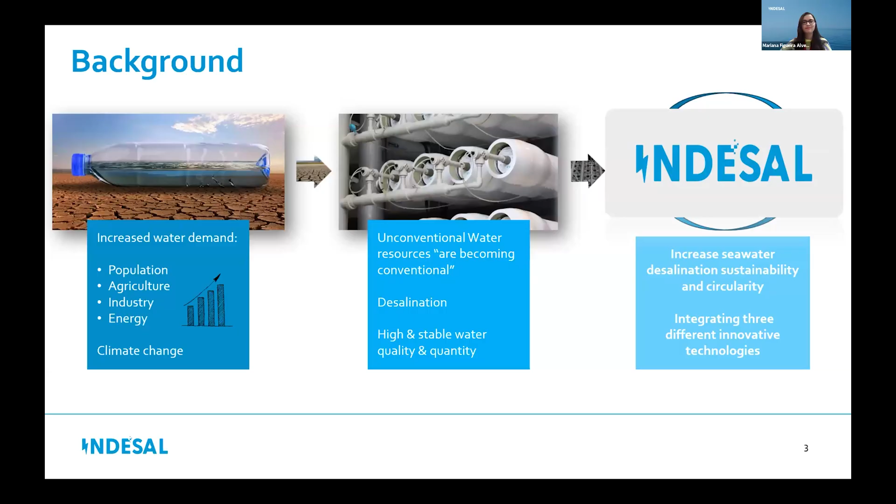The objectives of LIFE INDESAL are to improve the efficiency and circularity of seawater desalination with a novel integrated process. We have three pillars. First, we want to increase energy efficiency of seawater desalination, and for this, we proposed applying a low-pressure multi-stage reverse osmosis. The second one is to generate renewable energy from brine.

For this objective, we propose the use of reverse electrodialysis. And for the final objective, to transform brines into chemicals needed within the desalination process, we propose the use of electrodialysis with bipolar membrane.

Here we have not only the idea of increasing the efficiency of desalination of reverse osmosis, but also we want to give value to the brine, the desalination brine. The reverse electrodialysis and the electrodialysis with bipolar membrane will use this brine that before was considered a waste stream of the desalination process. Now we want to add value to this stream.

So here we have an overview of the INDESAL project. ACCIONA is the coordinator, and we have as partners Apria Systems, University of Cantabria, REDStack, and Revolve, partners across Europe. We started this project in August 2022. We are finalizing this month, but we are still operating the pilot, and we have plans to keep the operation a few months after the end of the project.

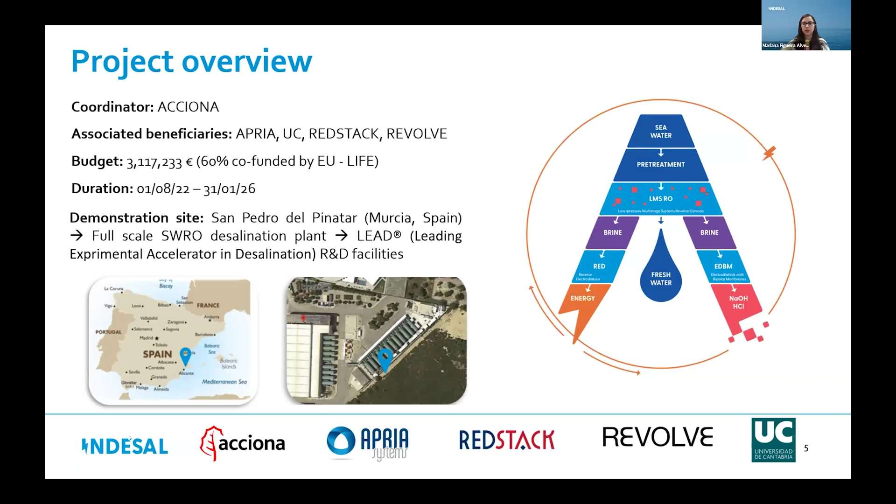So this is the technological scheme of INDESAL simplification. We have real seawater entering the system. We have first a pretreatment and then the LMSRO, low pressure multi-stage reverse osmosis. So the permeate of the LMSRO is fresh water that can be used for potable, agriculture, and industrial use. Here we have just the permeate, we're not doing the remineralization. We would need this step to have drinking water, but we can already check the quality of this permeate produced.

And with the retentate of the LMSRO, the brine, we can have two processes in parallel: the reverse electrodialysis, RED, to produce energy, and the EDBM, after nanofiltration pretreatment, to produce sodium hydroxide and hydrochloric acid that can be used in the cleaning procedures of the LMSRO.

So here the low pressure multi-stage reverse osmosis is the technological expertise of ACCIONA. We have two passes of reverse osmosis, so the principle is similar to reverse osmosis. We have seawater being pumped at high pressure against a semi-permeable membrane. The membrane lets the water molecules pass and will retain most of the ions. So we produce these two streams: the water molecules that pass the membrane produce the permeate, and the part with the ions that were rejected produce the brine. So we generate these two streams, and usually the brine was considered a waste of the process, but now we are valorizing this stream.

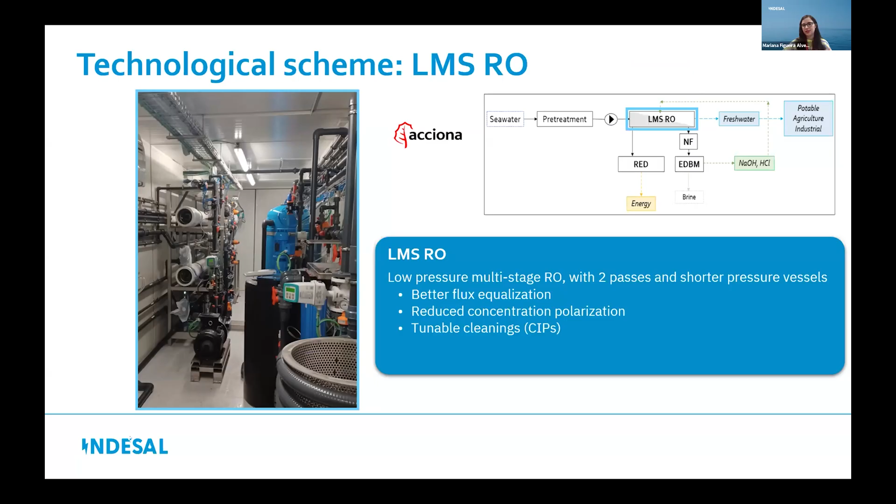So the other technology that we have is the RED. I will not explain the RED in detail because Hendrik will do this later. RED is the technological expertise here of REDStack and also Apria Systems. The technology uses ion exchange membranes and the salinity gradient. The driving force is the salinity gradient to produce renewable energy. And we have a flexible pilot, we can use 1 or 2 stacks.

So we have 2 stacks in series, and we designed it in a way that we could opt for using 1 or 2. For us, it's very interesting to use brine for the salinity gradient, because the brine has a higher concentration than the seawater, so we can generate an even more powerful salinity gradient using the brine from the LMSRO that used to be considered a waste of the process.

And here we have the other technology, the EDBM. It works in parallel with the RED, so the brine is divided for the two different pilots. I will not explain the EDBM in detail because Marina will explain better later. But it's a bit similar to reverse electrodialysis in that we have ion exchange membranes, but here we also apply a bipolar membrane, which is important for producing acid and base. While the RED uses the salinity gradient as driving force to generate energy, here in the EDBM we apply energy, so it's an energy consumption process where the electrical field generated is the driving force for the ion migration. So here we want to produce sodium hydroxide and hydrochloric acid that can be used in the cleaning procedures of the LMSRO, and this is the expertise of University of Cantabria and Apria.

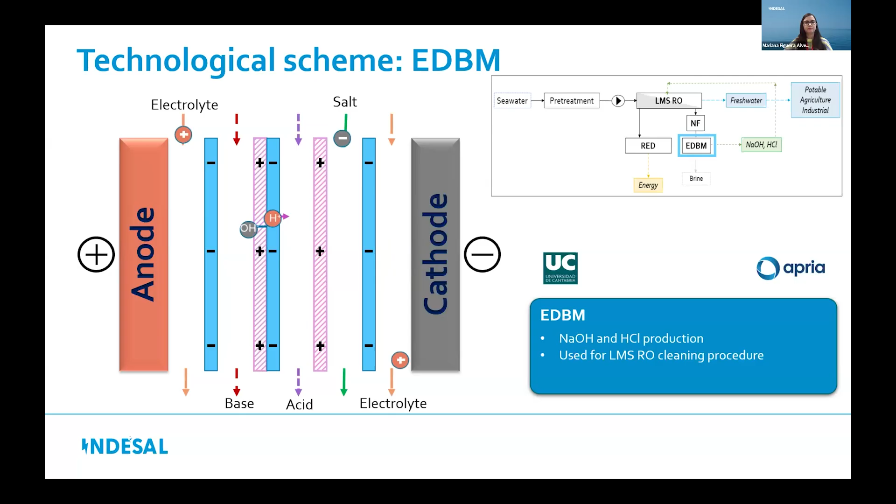And here you can see some images of our pilot. It's located at the LEAD facility of ACCIONA. We have 2 containers, one on top of the other. In the base we have a 40-feet container with the LMSRO and the pretreatments of the LMSRO, and in the top we have a 20-feet container with the EDBM and the RED pilot.

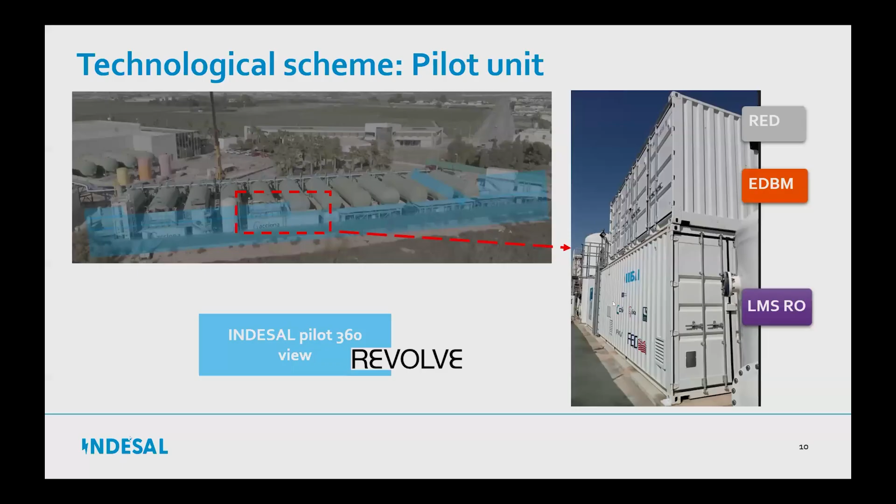And now I will present you some results that we obtained with the project.

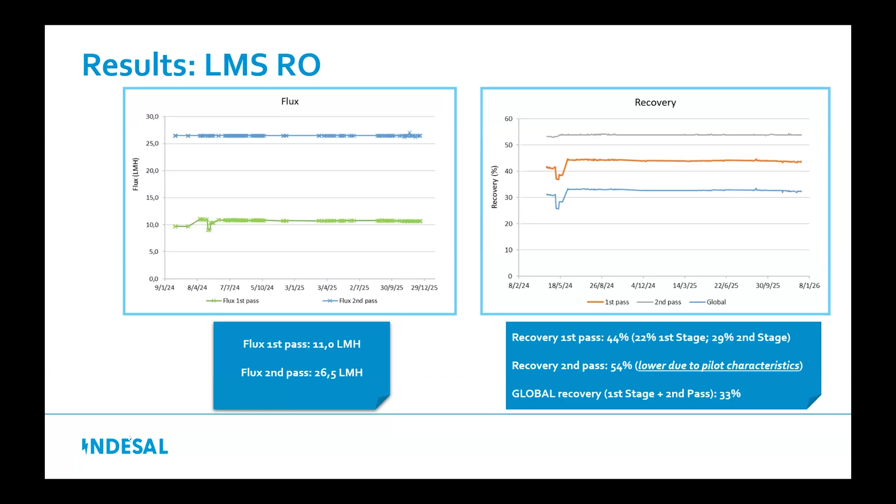And here we have the results regarding the quality of the permeate. We had a goal to produce permeate with TDS below 200, and we achieved this goal. We had an average of 180 milligrams per liter of TDS in our permeate, starting from 34,837. So it's a very robust system that can reduce not only the total dissolved solids but also sodium and chloride, which we kept below 100 milligrams per liter.

We can also see here the boron concentration. In the seawater we had a concentration higher than 4, almost 5. In our global permeate, we reached 1.5 ppm of boron without adding sodium hydroxide in the second pass.

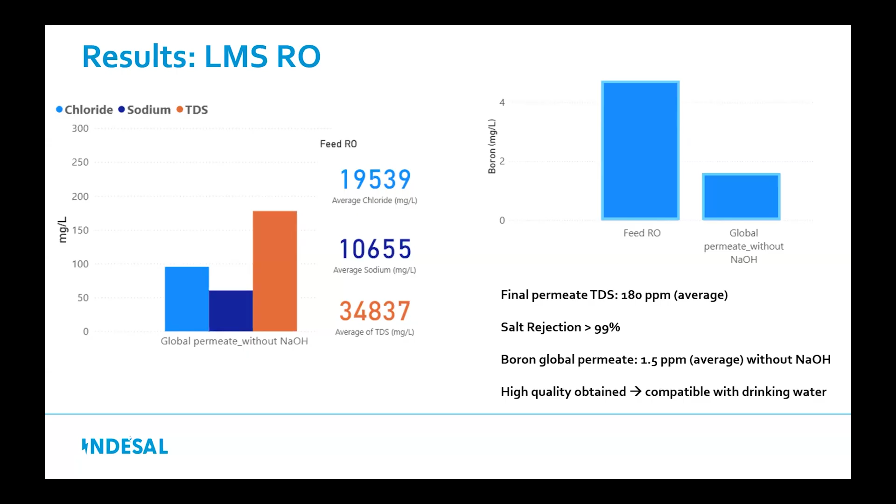Now let's also present some results of the RED. As I mentioned, we are still operating our pilot, so these numbers are not final. We're still calculating, but this is what we have so far.

We tested two options: two stacks in series or just one stack. With only one stack, we produce about 0.06 kilowatt-hours per cubic meter of brine, with 0.92 watts per square meter of membrane of power density. With two stages, we can produce more energy.

So up to 0.12 kilowatt hour per cubic meter of brine with a power density of 0.64. We saw that the first stage is more efficient to produce energy, but this was expected because when the streams enter the first stage, you have a bigger gradient, a bigger difference of salinity between the streams, and as ions migrate, this gradient reduces. But still, when they leave the first stack, there is still some capability to produce more energy, still a gradient that can be explored. So with the two stages, we could reach a higher energy production per cubic meter of brine.

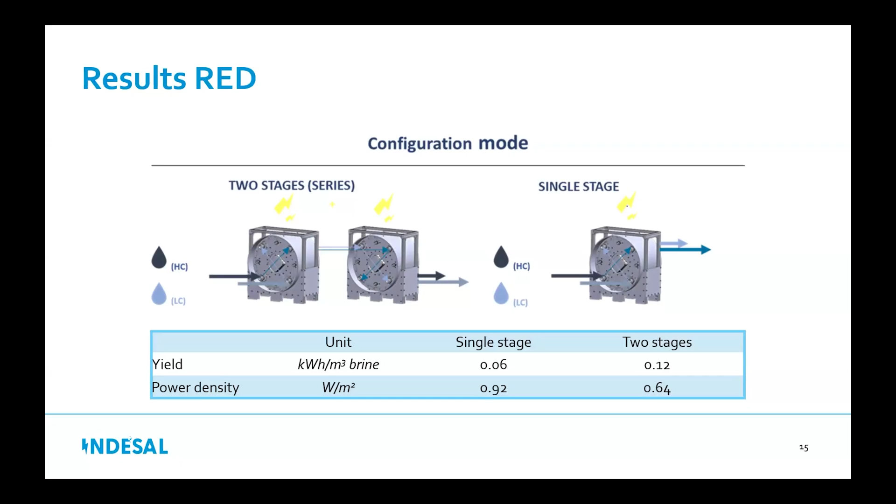So in conclusion, we have here the first objective to increase energy efficiency of seawater desalination. With our LMSRO system, comparing with a conventional reverse osmosis with second pass in similar conditions, like same quality of feed as our process, we obtained a reduction of 0.2 kilowatt hour per cubic meter of permeate in the specific energy consumption. Regarding the generation of renewable energy, we could produce up to 0.12 kilowatt hour per cubic meter of brine with the reverse electrodialysis. And with the electrodialysis of bipolar membrane, we could produce 100% of the chemicals needed for cleaning, making our desalination process more circular.

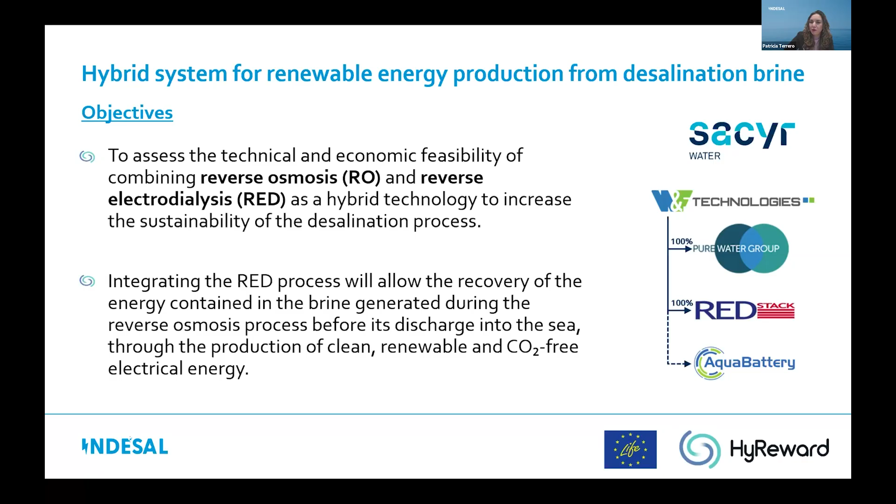The project is coordinated by Sacyr, and we work in a consortium with two companies from the Netherlands: REDStack, which is also involved in the INDESAL project, and Pure Water Group.

Mariana has already presented the RED technology, so I'm not going to explain it deeply, but you know that reverse electrodialysis is a technology that allows the generation of electrical energy from the salinity gradient between two streams with different salinity concentrations. The energy produced with this technology is called blue energy, and is considered a completely renewable and sustainable energy without CO2 emissions or other greenhouse gas emissions.

In the technology concept that we have validated in the LIFE HyReward process, we have used the brine of the RO process as the high salinity stream at the RED process, and the treated wastewater, the effluent of a wastewater treatment plant, as the low salinity stream.

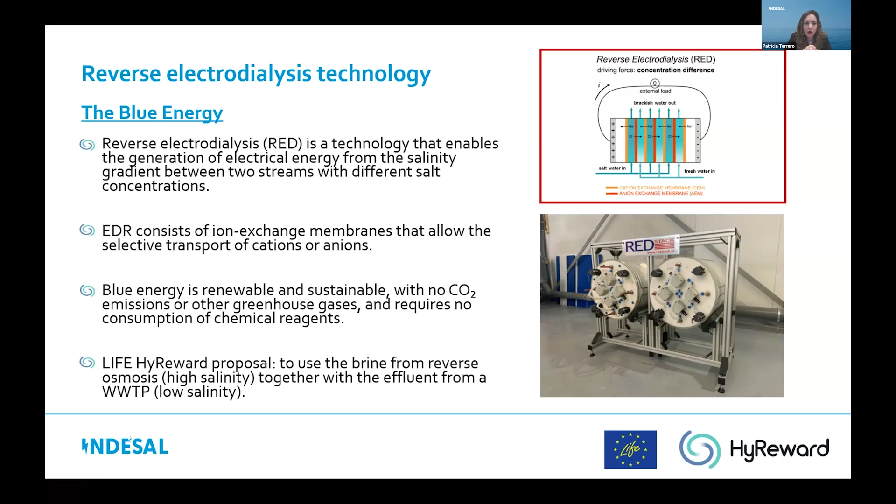This brine has a high concentration of salt and has a high potential energy that can be harvested in the RED process. But for this we need a stream with a low concentration of salts. As I have said, in our case we have used the effluent of the wastewater treatment plant, the treated wastewater. These two streams, the brine with high concentration of salts and the treated wastewater with low concentration of salts, we have fed to the RED process.

This process is able to harvest the total salinity gradient between these streams, generating energy in the RED process, and also producing a reduction in the salt concentration of the brine. For this we have studied another alternative of this technology concept: the recirculation of the diluted brine again to the RO process in order to increase the total recovery of water.

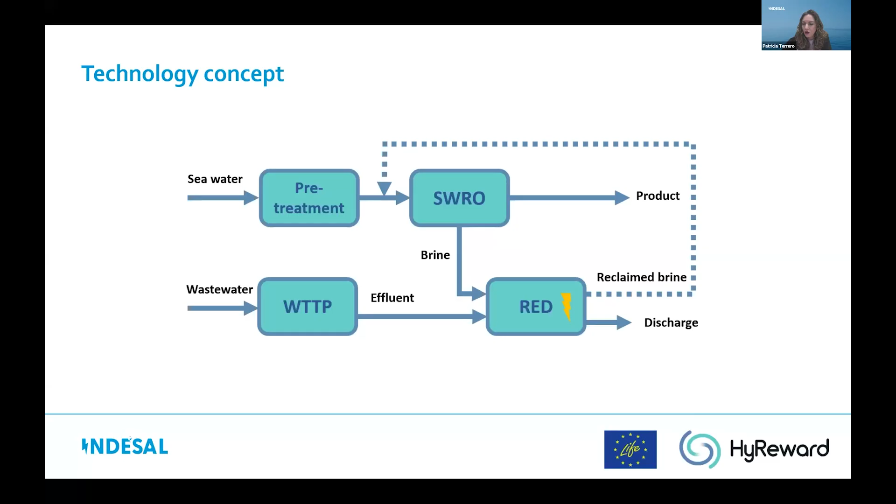And if we recirculate this diluted brine, we are also going to improve the total water recovery of the desalination process, which translates into the same permeate production or total water production, while reducing the seawater intake and the pretreatment needs in the Desal plant.

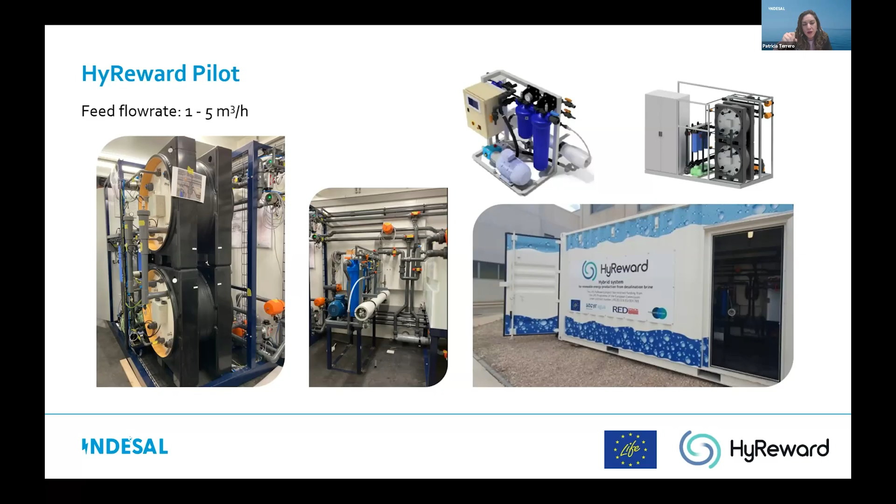Here you can see the RED stacks developed by REDStack, and for example the electromembrane. Well, I have said we decided to install it in a container in order to test the technology in different locations, and we have validated the technology in different desalination plants.

In two phases. The first validation was carried out at the Alicante desalination plant in the southeast of Spain. In this phase we have validated the technology to investigate the production of electrical energy in the RED process using RO brine and permeate as a low salinity stream, because in this plant we didn't have available real treated wastewater, so we optimized the technology using permeate in this case.

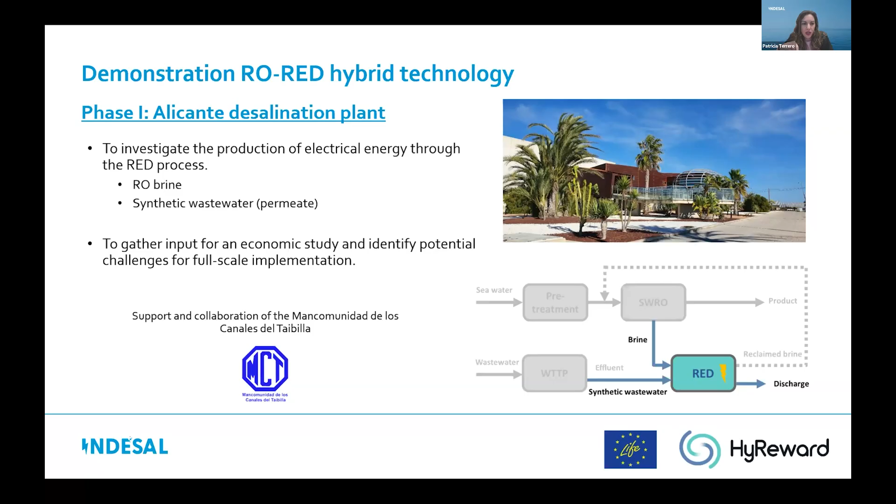This experimentation also allowed us to start the economic study of the technology and identify potential challenges for its implementation at full scale. The objectives of this phase were the validation and optimization of the RED technology to maximize blue energy production using permeate as the low salinity stream and brine as the high salinity stream.

In this case we have obtained a maximum energy production of 0.31 kilowatt-hours of blue energy per cubic meter of brine. And if we could install the technology at full scale, with this total energy production we could cover 66% of the total energy consumed in the pretreatment. So it's a very important ratio.

And also we have obtained a reduction in the brine salinity that depends on the ratio and the combination of flows between brine and treated wastewater. But we have obtained brine salinity close to 35 grams per liter, similar to seawater levels, enabling the potential recirculation of the brine again to the RO process.

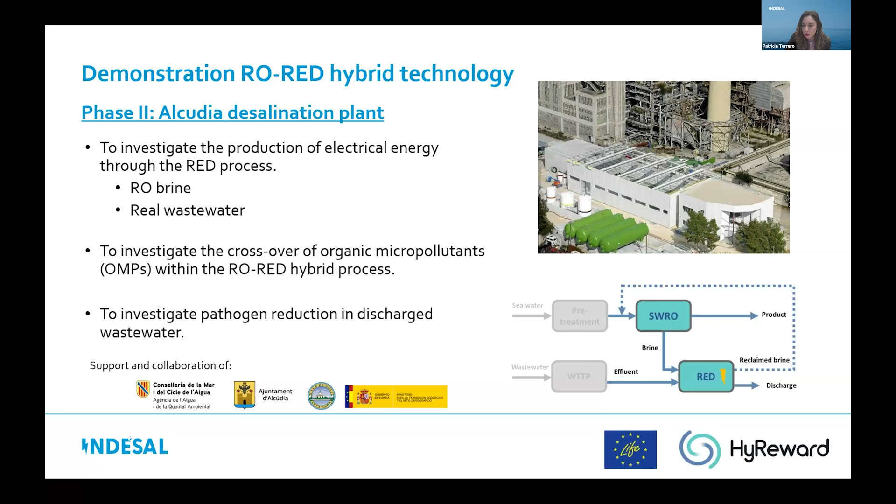I would like to say that in this phase we changed the membranes used in the RED process. We changed them because in Alicante we saw some leaks in the membranes, so we decided to replace them and install another type with a more compact design, and compare the results obtained with both kinds of membranes.

With these new membranes we were able to reduce the leakages in the process, but we obtained less energy production. That was the main impact. In the next slide we compare the results between Alicante and Alcudia: for example, in Alicante we obtained a maximum production of 0.31 kilowatt-hours per cubic meter of brine, while in Alcudia we obtained a maximum of 0.24.

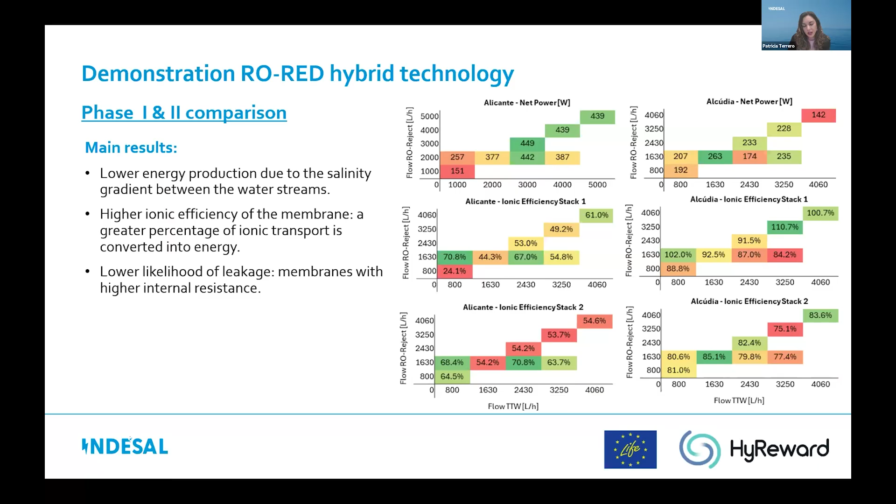Also, we obtained higher ionic efficiency of the membranes due to the new design installed in the RED process, but we obtained lower energy production due to the higher internal resistance. However, we were able to reduce the leakages we suffered in Alicante. For this reason, we prefer not to use the second model of the membranes.

To sum up, the HyReward project seeks to improve the energy efficiency of seawater desalination while optimizing water recovery, reducing brine discharge, and minimizing the use of chemicals, promoting a more efficient and sustainable solution focused on the circular economy and water resilience in water-scarce regions.

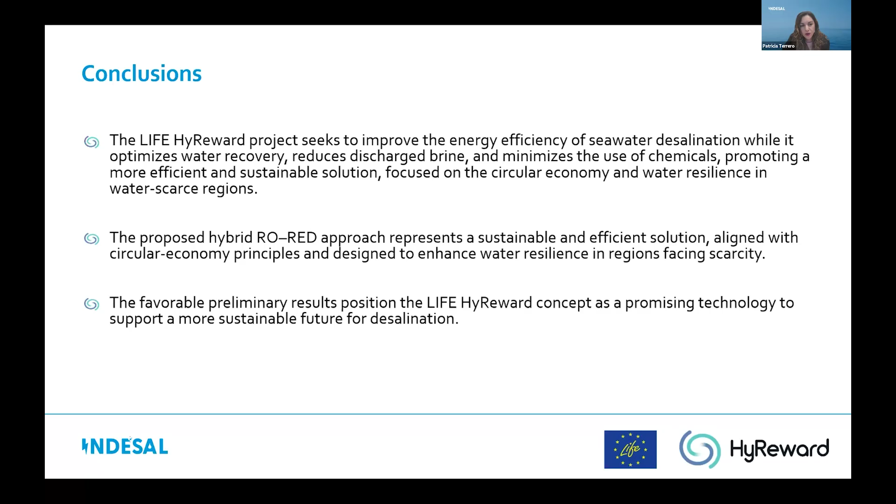The proposed hybrid RO-RED approach represents a sustainable and efficient solution aligned with circular economy principles and designed to enhance water resilience in regions facing scarcity. The favorable results position the LIFE HyReward concept as a promising technology to support a more sustainable future for desalination. Here you can see the main data of the project.

As I said, this is a project funded also by the LIFE program. Sacyr has been the coordinator, and we have worked in a consortium with REDStack and Pure Water. The project finished recently, in October of last year. Well, this is all. Thank you for your attention.

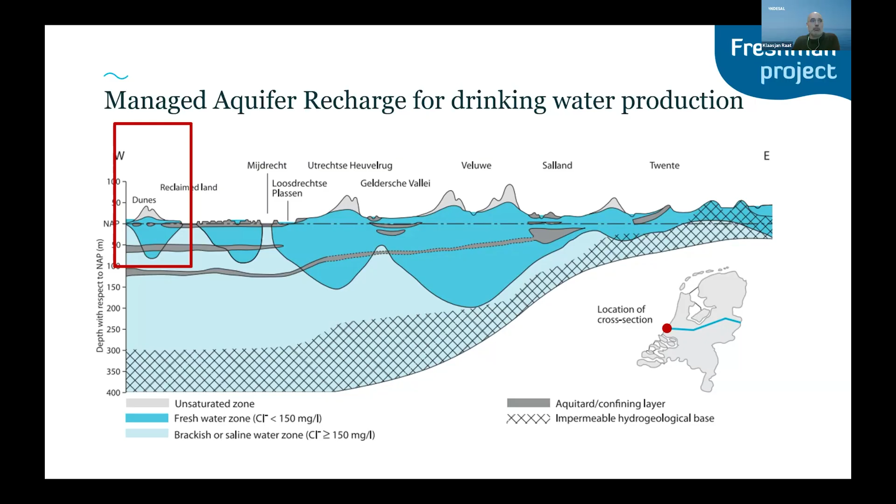Now, these infiltration systems are beautiful as well, integrated into the nature area. This is what an infiltration pond looks like in the coastal dunes. But basically, the systems are at the end of their maximum capacity.

Climate change, low flows of the River Meuse and Rhine, especially deteriorating water quality, makes us not always able to take water from these rivers, and there's an increase in water demand because population is growing.

So what we looked at in this project is, if we extract groundwater from underneath that system, can we enhance the functioning of that system? But also, and I think you may be interested in that, can we use that brackish groundwater as an additional drinking water source?

In normal operation, this is kind of a schematic. You see the freshwater lens that we use and replenish with river water. If we have an intake stop, we have to switch to deeper wells to produce drinking water from, depicted in this picture. But the salt and brackish groundwater is very close, so once we start extracting water there, you have the risk of upconing.

Now, I'm very much into water resources, I have a background in hydrogeology and how to manage these types of systems. If you also extract the deeper underlying brackish or saline groundwater, you can restore the hydraulic gradient, and you can make sure that, one, you increase that freshwater lens, but also prevent any salinization of that freshwater well.

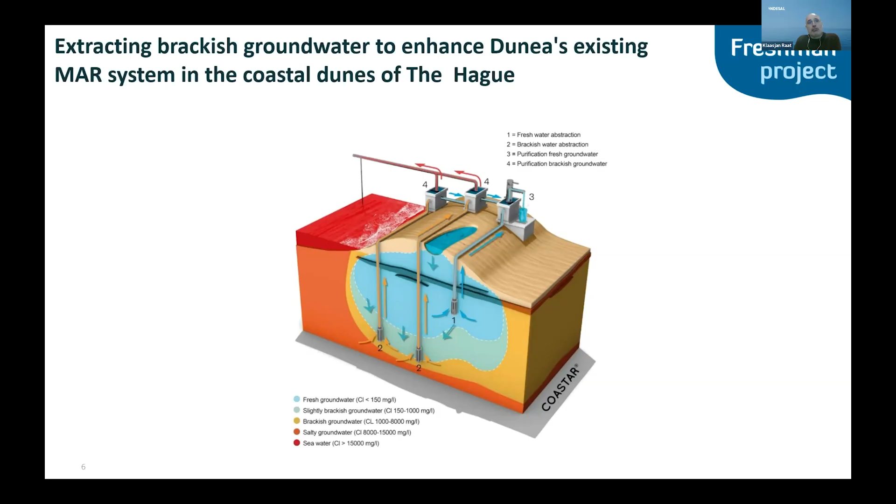This is what we tested in the whole freshman project, both the hydrogeology, but also, of course, if you extract brackish groundwater, it's a perfect source to produce drinking water from. This is what the whole pilot looked at.

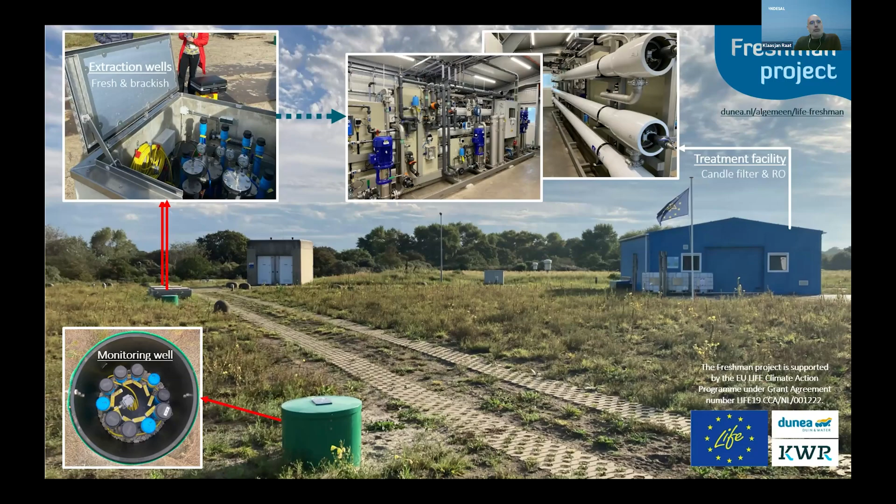So we had a subsurface part with extraction wells for both fresh and brackish groundwater, a whole set of monitoring wells, and in the small building there we had the RO treatment facility, where we did all these types of tests. Now I'll show you some highlights and brief results, first some hydrogeology, then I'll get to results on the RO treatment.

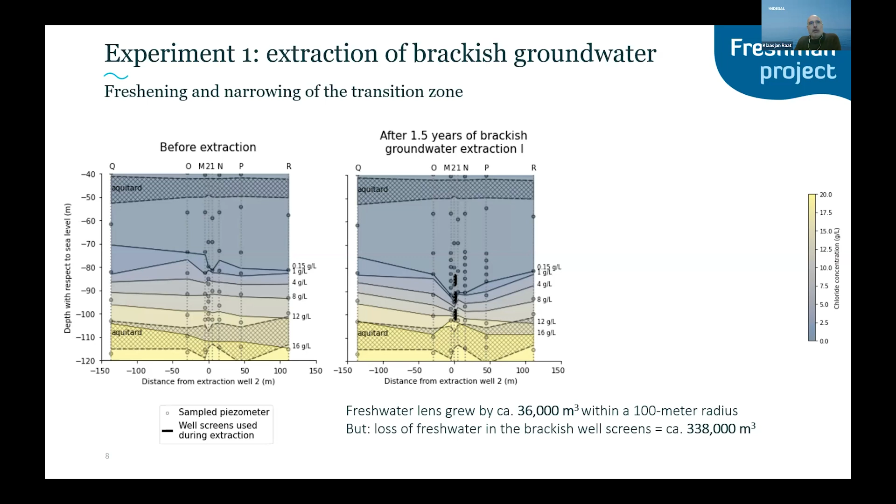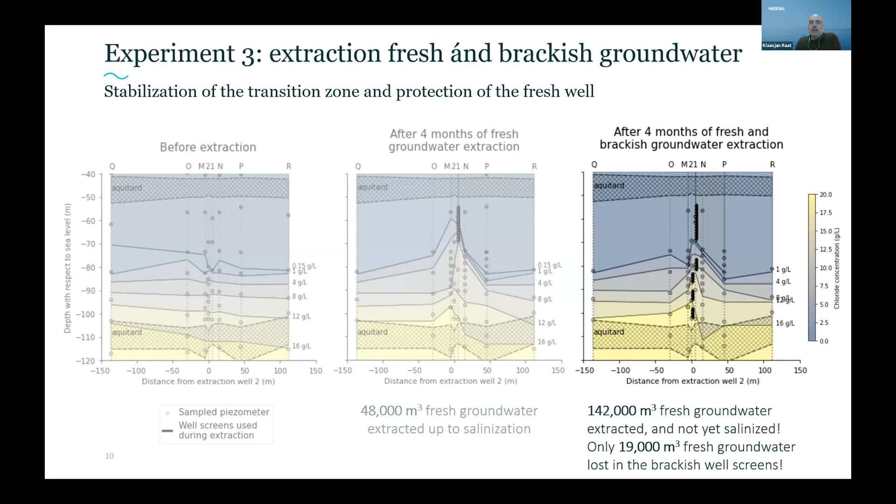So what we did then was extract brackish groundwater again, but combine that with fresh groundwater extraction to see if we could balance the fresh to saline interface and make these things stable. That actually worked really well. We could produce fresh groundwater without those wells getting salinized, by extracting a small proportion of this brackish groundwater.

Now, you're probably more interested in that brackish groundwater, how you can use it. So we had experiments with reverse osmosis treatment, a two-stage system. We operated it at 50 to 65% recovery because we wanted to refrain as much as possible from any anti-scalants.

We had a stream of about 10 cubes per hour permeate production, but I think what is most interesting for you is that we had an anaerobic treatment. That groundwater is anaerobic and also has a lot of dissolved iron, so keeping the oxygen out is really key to operating these types of systems.

My technology colleagues and water treatment colleagues were complaining it was kind of a dull pilot. With this anaerobic groundwater, it's really good in terms of not having any scaling issues. The main scaling issue was trying to keep the oversaturation of especially the carbonates under control.

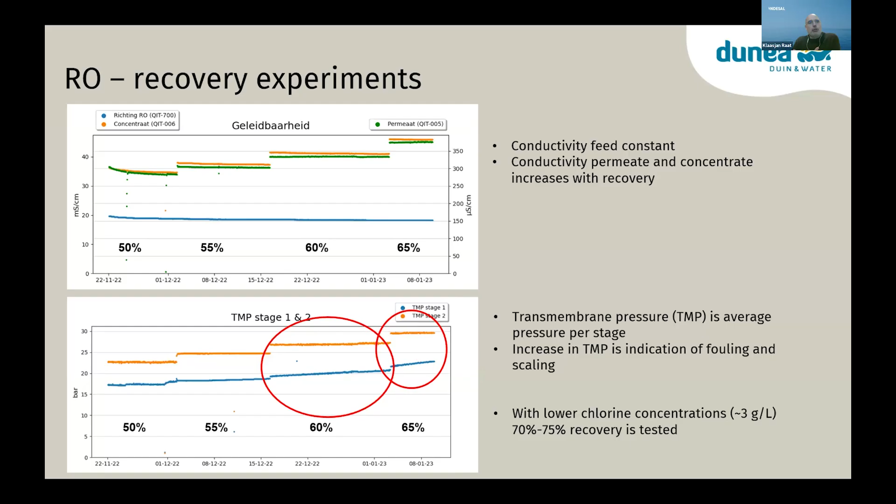Some pictures on conductivity, but also on membrane pressure - with 50-55% recovery we could really keep this stable without having any anti-scalant dosed. If we go higher in concentration or recovery, then you get some first scaling. Of course, flux measurements - we also did some experiments, or colleagues did, with fluxes over the membranes, to really get this system in place.

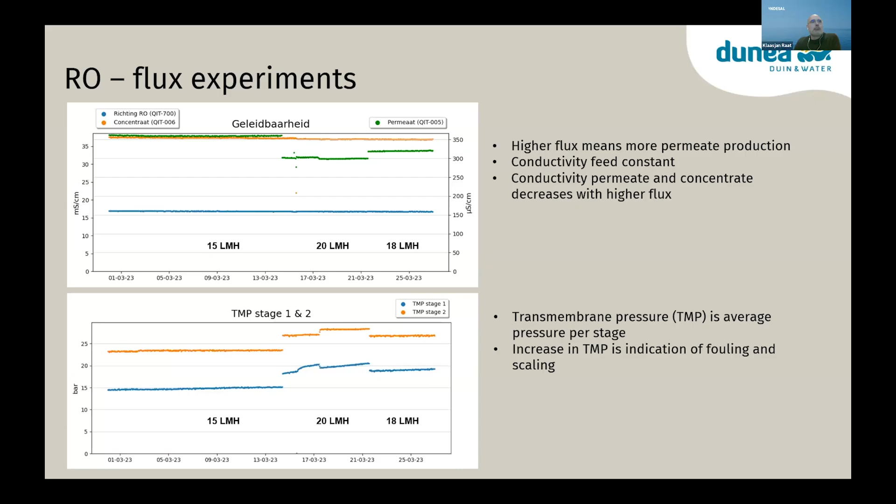Now what's very important is the water quality of the permeate. If you want to produce drinking water, ammonium and boron are elements that can partly pass membranes. But also, if you want to produce drinking water, you have to think about remineralizing it, so we have to do something about the calcium, magnesium, and bicarbonates to get it to drinking water levels.

I think this is one of the most interesting parts from the water treatment and drinking water production side - the effects of mixing this permeate with the normal drinking water produced there. In the Netherlands, we do not chlorinate our drinking water. So when the drinking water goes into the network, no chlorine is added. We can do this because we have moderate temperatures, so the water doesn't get that warm, but also we make sure we have a very low growth potential for any bacteria. In that way, we can keep the drinking water biologically stable without adding any chlorine before distribution.

But what happened if we mix the permeate with the drinking water? Remember, this permeate was produced from anaerobic groundwater. We had a lot of biofilm production. So actually we had, in our terms, biologically unstable water, and we cannot use that and put it in the net.

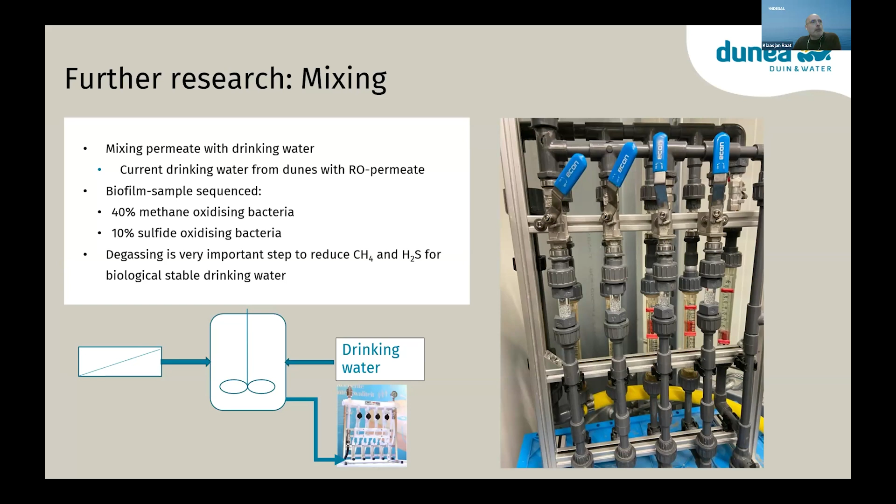And so we did experiments and tests, and a lot were on methane and sulfide oxidizing bacteria. We are further researching this, but the theory now is that those little traces of methane and hydrosulfuric acid produce a little source of these bacteria.

These bacteria are in that water, present in the drinking water, and we got biologically unstable drinking water. So degassing there is very important. I think, yeah, this is my last slide. So I took you a bit into the groundwater and the subsurface.

We can improve these managed aquifer recharge systems by combining them with tailored brackish groundwater extraction. Anoxic groundwater is an excellent feed for reverse osmosis treatment, keep the oxygen out, obviously. And that degassing was very important here, degassing of the permeate after you produce it.

And I think, yeah, that's what I wanted to share with you today at this webinar. So thanks, we'll move on to the next presentation. I'll pass the floor to José Luis Cortina Pallas from EXBRINER.

Thanks, Micaela, and thanks to the INDESAL project for this invitation. The project that I'm going to present is totally different. It's a doctoral network, training people on research, and I'm doing this on behalf of the coordinator, Efrem Curcio from University of Calabria.

This doctoral network was built to develop activity in what we call circular blue industry, focusing on how seawater desalination brines could provide more water, produce chemicals, and produce energy. These three main vectors of development were devoted to process intensification, developing new membranes, new materials, new processes, and then validating them for energy and chemicals production, also trying to develop this concept of seawater mining.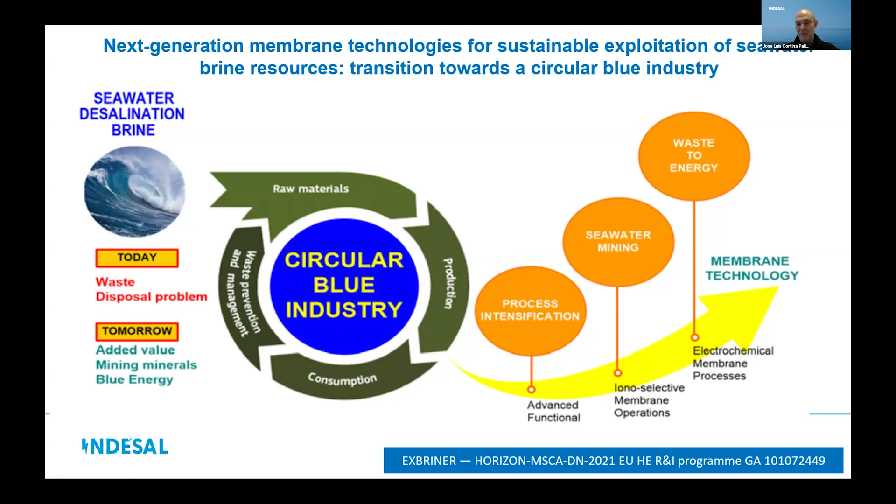More specifically, the project incorporates 10 different universities and 4 industrial partners, and develops a concept where, on the upper part of the slide, the new developments, this new generation of membrane technologies, are focused in 3 main areas.

The first is working on this concept of thermoplasmonic membranes. The second is to develop membranes where the selectivity patterns are tuned by introducing metal-organic frameworks to introduce very selective ionophores like zeolites. And finally, working on optimizing the performance of ion exchange membranes, and new ion exchange membranes that are also being developed in the project.

These materials provide new solutions to something clear for most of the audience: when we have seawater desalination brines and want to recover materials to produce chemicals, we need two things. One is to pre-treat the brine, typically by nanofiltration or electrodialysis, to reach one stream very rich in monovalent ions on the bottom, and on the upper part a stream very rich in divalent ions, where we could recover, for example, magnesium.

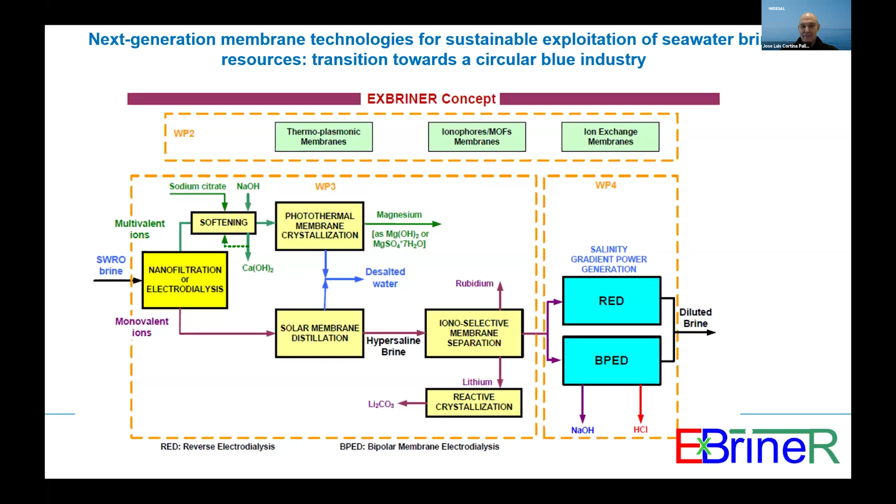Now we have a very stressing next few minutes, because we have 10 projects or 10 ideas to present, and I've prepared one graphical abstract for each, so I think we'll be able to do it in the time we have. The first project will be presented by the students, because the most important thing you are going to see now is the candidates who will soon become new engineers starting to work maybe in your companies.

This is the work developed by Mohammed Hassan at Leuven University. Hassan is trying to develop new nanofiltration membranes using a different polymer chemistry: instead of using polysulfone as a starting point for building the nanofiltration membrane, he uses polyacrylonitrile. After that, he has been working on interfacial polymerization to develop the selective polyamide top layer that we are familiar with in nanofiltration membranes.

All the selectivity patterns are allocated to the use of these metallic organic frameworks or zeolites, placed either in the upper layer, or even located between the polyacrylonitrile or the polyamide layer. This is applied in the first stage of separating monovalent from divalent ions.

Now moving on to activities related to overcoming the use of reverse osmosis, using membrane distillation as a technology for increasing water recovery, and also providing the possibility to move to recovery of salts by using crystallization.

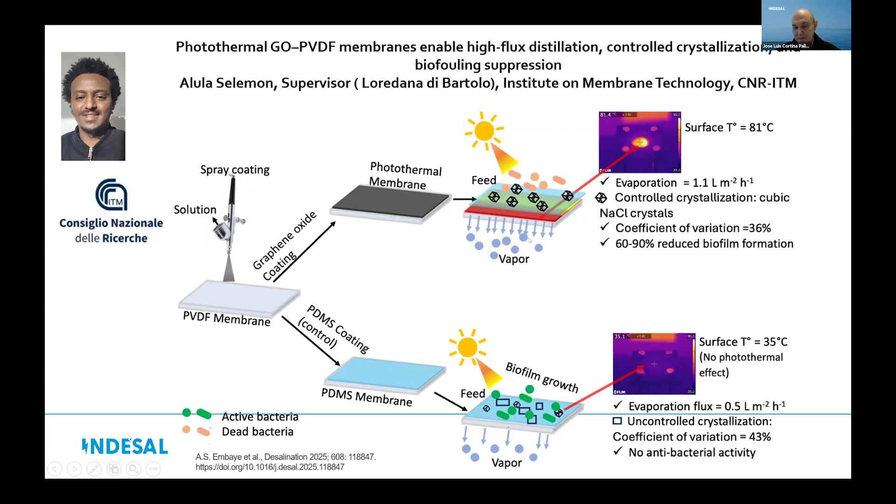The third project, developed by Indira Chimanlal at INSA Toulouse, is a more practical or engineering application of this concept, where hollow fiber membranes are used in vacuum membrane distillation studies. The idea is to work on brine concentration for increasing water recovery, incorporating solar energy as a source to achieve the concentration and crystallization stages.

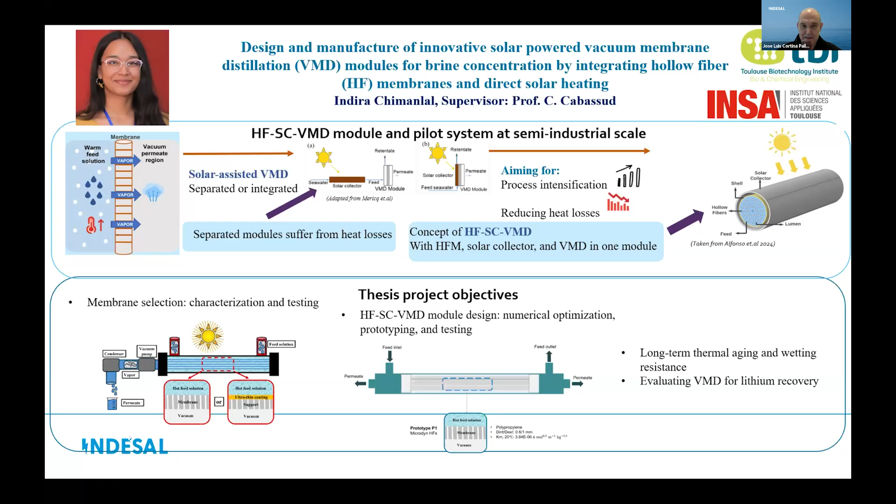The last topic in that area, developed by Tstone Dadiani at the University of L'Aquila in Italy, is a more fundamental study on the use of XPS for characterization of membranes and the processes occurring at the surface, especially when working with membrane distillation and membrane crystallization. The work is focused on lithium recovery projects, identifying the stages that provide the possibility to reach suitable nucleation and crystallization conditions.

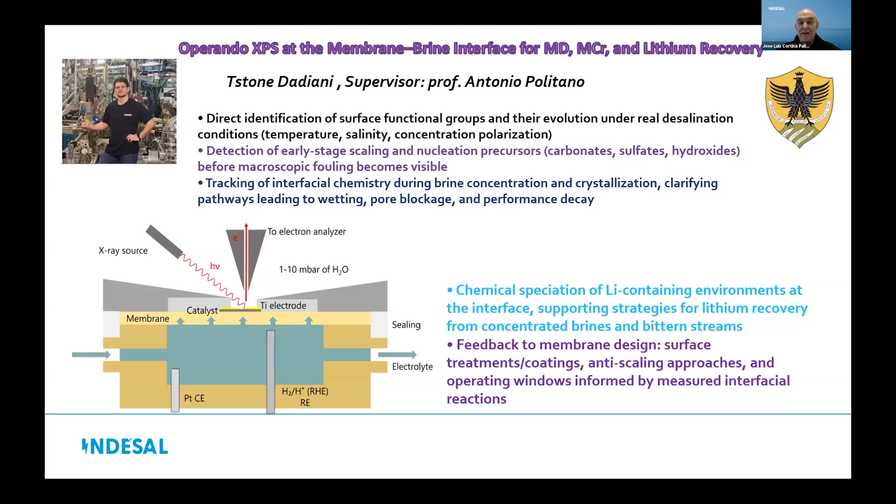We move to the next group of students working on the development of ion exchange membranes and applications. The first case is Mecca Venio, working at Nova University in Lisbon.

Her work focuses on using 3D printing to develop profiled ion exchange membranes, shown here. She has been working on developing both cation and anion exchange membranes, with detailed structures creating profiles using stripe or chevron units. The work is now being validated in different applications, from hydrogen production to reversal electrodialysis and also electrodialysis.

The next project, developed by Federico Dei Sommi, is working at UCT Prague, where there is a technology group focusing on modeling and characterizing ion exchange membranes and the performance of these systems. He will develop validation of new ion exchange membranes, including others developed by incorporating metallic organic frameworks.

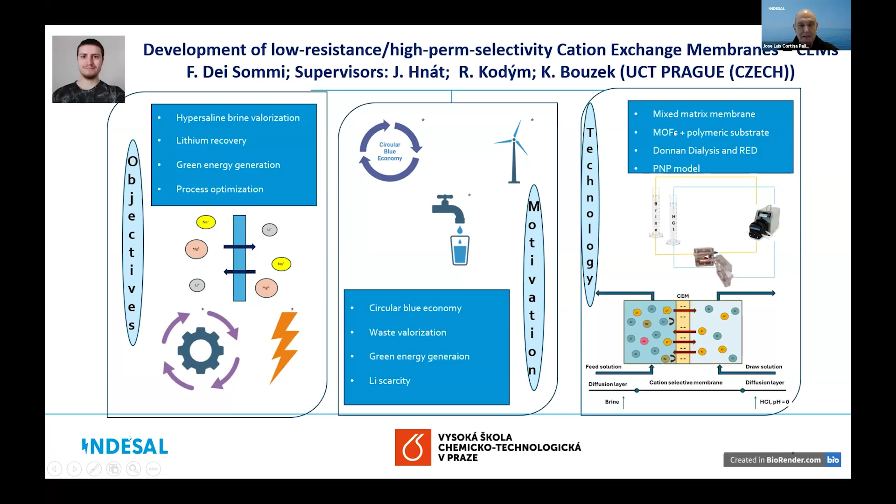In the same direction, the work being developed by Anastasia Lima here in our department in Barcelona should be mentioned. She has been focusing on the application of ion exchange membranes and bipolar membranes in the on-site production of chemicals from sodium chloride brines, especially focusing in these first stages on understanding the effect of temperature. We have been seeing that typically most membranes are characterized at room temperature.

But as was commented by Mariana, temperature evolves, for example in these pilots, moving from around winter temperatures below 20 to close to 30 in summer operation, and in other industrial processes the temperature of the stack operation could reach up to 40 degrees.

And just to finalize, if I could, Michael, I have three last projects. These are the ones working on more industrial applications of these technologies.

I should mention first the work developing at Aalborg University, working on the use of membrane distillation to demonstrate the production of magnesium as magnesium sulfate or lithium as lithium carbonate from the brines generated from seawater desalination brines.

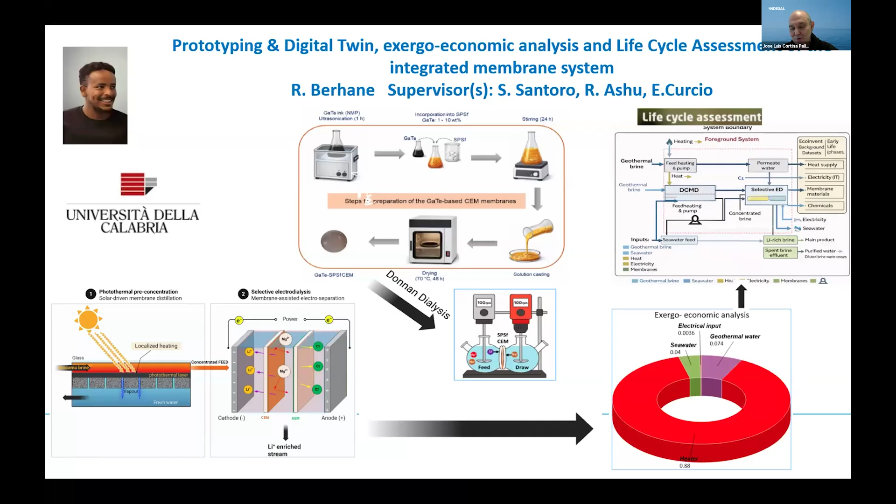The work is being developed also by Robiel Berhane, working at the University of Calabria. It has been integrating the use of both membrane distillation as a pre-concentration stage, and after, in a second stage, ED or ED bipolar for the demonstration of the production of lithium hydroxide and lithium carbonate.

And that's all. I think I was a little bit over the time, but I hope it was clear. Remember that from this project, the most important outcome is those students developing this training work.

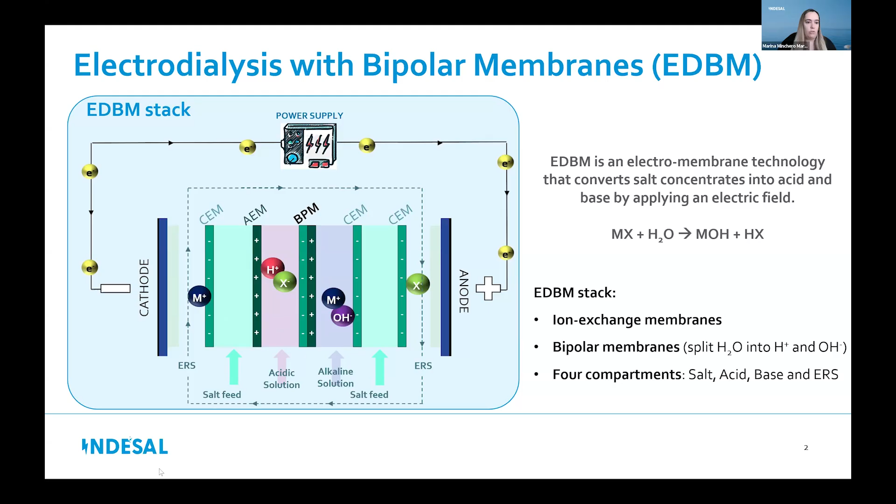As a result, we have four different compartments in the EDBM stack: the salt feed, the acidic solution, the alkaline solution, and the electrolyte rinse solution.

For the desalination application, the most common use of the EDBM is to valorize the brines to produce hydrochloric acid and sodium hydroxide. The EDBM can be applied in desalination to produce these products for direct use within the desalination plant, or it can be integrated within broader brine valorization strategies.

But in the case of the Life INDESAL project, the objective of the EDBM unit was to produce sodium hydroxide and hydrochloric acid for cleaning operations and pH adjustment in the LMSRO unit, thus avoiding the external supply of these chemicals in the plant.

Here you can see a very basic layout of the EDBM process, where the acid and base operate in batch mode, recirculating the streams until reaching the desired concentration of both chemicals.

In this case, the brine that we were using to feed the EDBM comes directly from the LMSRO. The LMSRO process has the particularity that it uses real seawater, and the content of magnesium and calcium has a significant concentration in the brine.

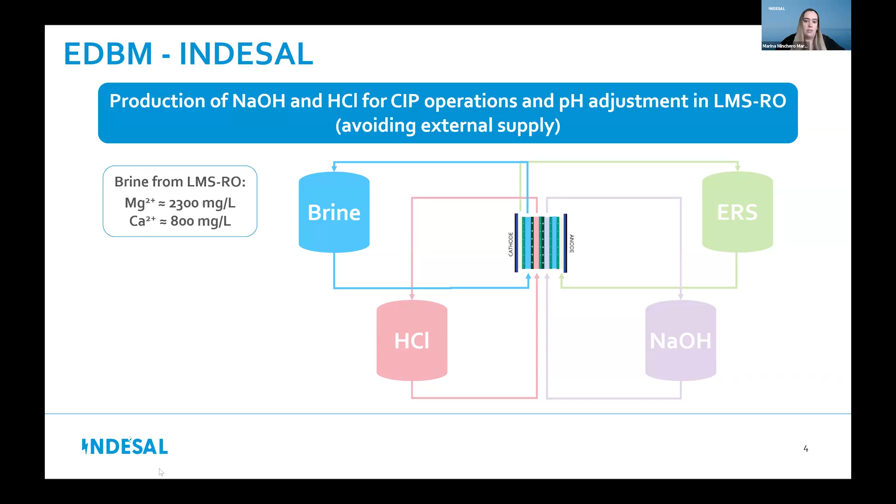So these ions are not recommended for EDBM operation because at pH higher than 10, they tend to precipitate in the form of hydroxide, magnesium hydroxide, or calcium hydroxide. These ions can cause undesirable phenomena such as an increase in electric consumption, scaling, or obstruction in the system.

So to address these issues, we installed a pretreatment stage consisting of a nanofiltration step to reduce the quantity of magnesium and calcium.

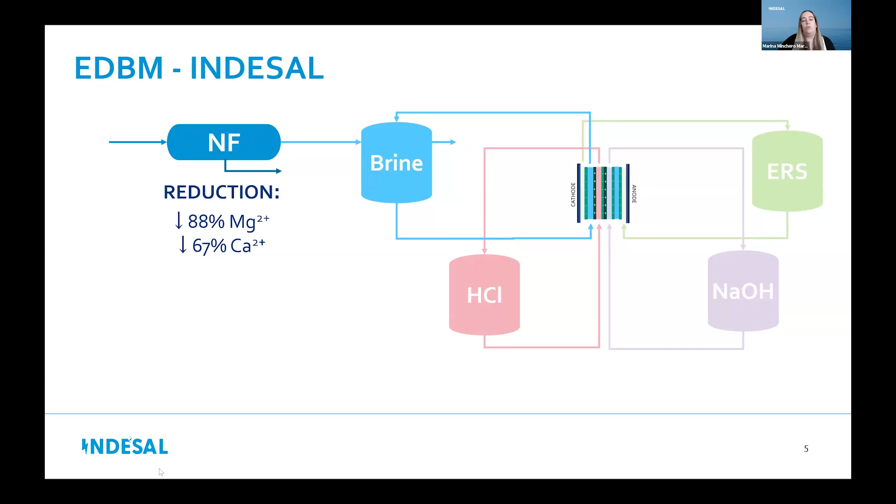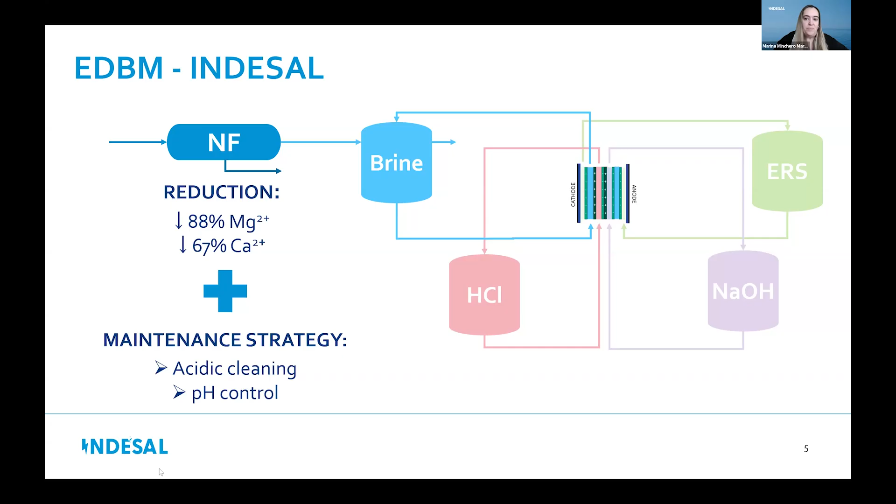We almost reduced 88% of magnesium and 67% of calcium from the brine. As we did not remove the whole magnesium and calcium ions, we also implemented a maintenance strategy to reduce possible problems caused by this, consisting of periodic acidic cleaning of the whole system and control of the pH. With this approach, we could operate under stable conditions and no operational problems related to these ions were observed.

Regarding the production performance, we reached the target objectives in terms of production of both sodium hydroxide and hydrochloric acid in the plants. Beyond INDESAL, the EDBM has already been applied in other desalination related projects, and I would like to mention a couple of these examples of application. The first project I want to talk about is the Water Mining project.

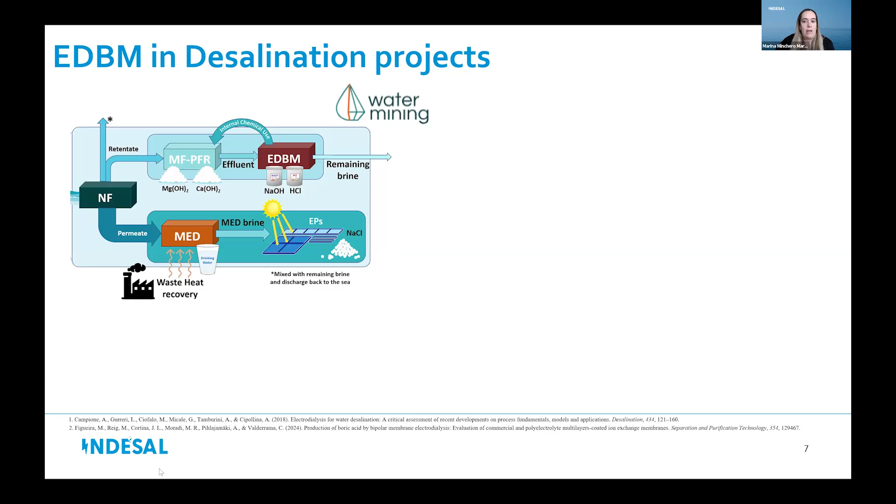The main objective of this project was to recover minerals and critical raw materials from brines and other saline streams. In this project, the EDBM was applied to produce sodium hydroxide, which was used internally for magnesium recovery under precipitation. So in this case, the sodium hydroxide production was not used for cleaning operations, but for the recovery of magnesium.

Another project I would like to mention is the Sea4Value project. This project also focused on the recovery of valuable minerals and metals from desalination brines using different technologies, and of course these technologies included the EDBM. In this case, the EDBM was used for recovery of boron from brines, applied to produce boric acid. So these are two examples that really highlight the versatility of EDBM as a technology for brine valorization in desalination.

To finish the presentation, I would like to briefly mention some emerging applications of EDBM that are still in an early research stage, but show strong potential for desalination applications.

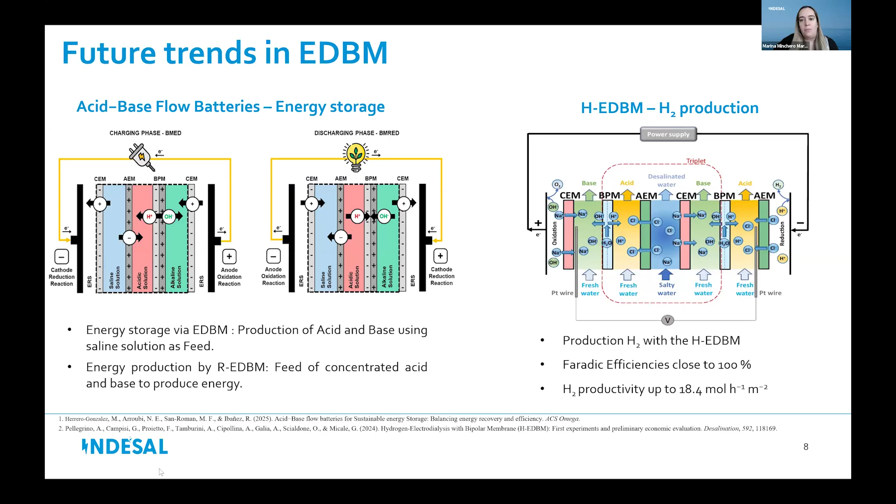So that's all from my part. Thank you very much.

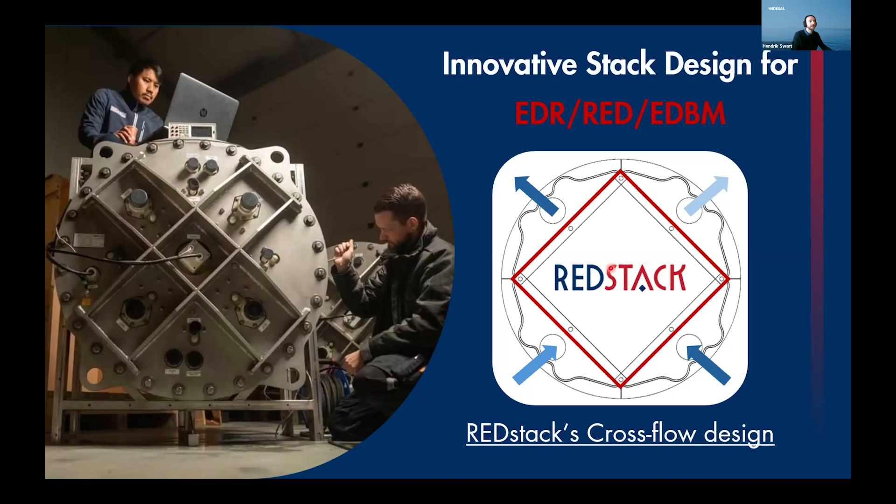What we then make are basically these circular discs with a certain amount of membrane area inside of it. These discs we can stack together and assemble into an electromembrane stack. Depending on the treatment capacity required, you can add more or fewer of these discs. Thanks to this design, it's a lot more energy efficient, and for desalination applications, so electrodialysis, we can see a 50% lower energy consumption compared to conventional stacks that are in the market.

We are focusing on three different applications where we want to implement our innovative electromembrane stack design. The first one being reverse electrodialysis, so the production of renewable energy. Second is electrodialysis reversal, or brackish water desalination, or a very upcoming and hot topic, brine treatment. And the third application is electrodialysis with bipolar membranes.

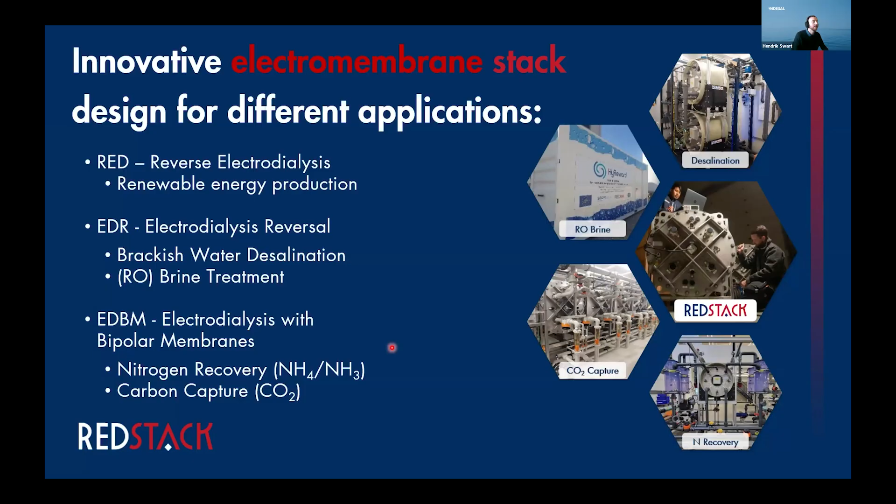In the previous presentations, already something has been presented on RED and EDBM, so I will give you some examples of electrodialysis reversal. But before I go into detail, I will give you a little bit more insight on how the process works, and also to clarify some things, because there's often confusion between electrodialysis reversal and reverse electrodialysis. Even though there are a lot of similarities between these two technologies, they are not the same, and in fact, they are the opposite of each other.

I will start first with the electrodialysis reversal technology. This technology is used for desalination. It's an electrical driven desalination technology to remove ions from water. You do it with the use of a device called an electrodialysis stack, or what we refer to as an electromembrane stack. It consists of four components: anion exchange membrane, cation exchange membrane, spacers, and electrodes. And the membranes allow the selective transport of ions.

So if we then feed water through this system, we introduce ions. In this case, on the screen, you can see sodium and chloride. Then we apply a potential to the electrodes, and the ions are transported towards the opposite charged electrode. In this way, you create compartments that are being concentrated, so salt is transported to them, and we have compartments where the salt is being removed from, creating a dilute stream.

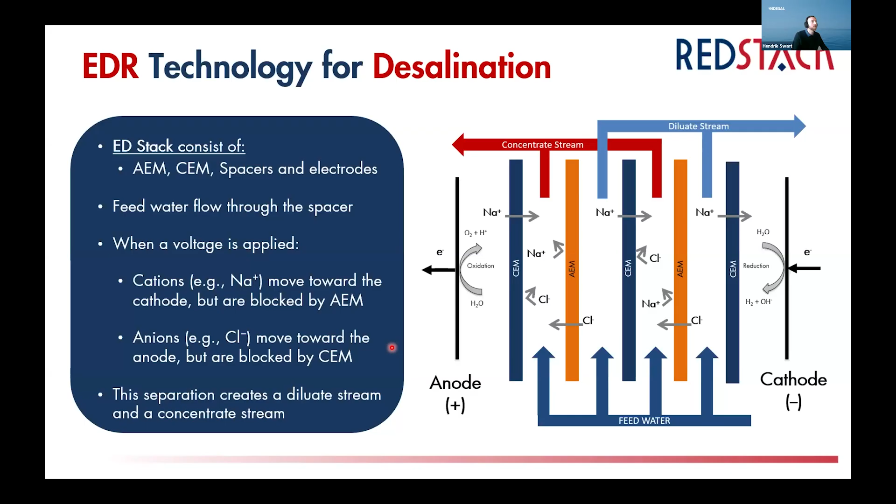And the reversal then comes into play when we reverse the potential. What that means is that we can reverse also the direction of the current, and that means that we reverse the direction the ions are transported to, and the previously concentrate compartment becomes a dilute compartment, and vice versa for the dilute compartment. This way, it's a self-cleaning process because it helps reduce fouling and also scaling, and it overall improves the efficiency and the lifespan of such a device and process.

Then coming to reverse electrodialysis. As the name suggests, it's the reverse of electrodialysis. So let's have a look. Here we have the same hardware. We use the same materials. Again, the membranes, anion exchange, cation exchange, spacers, and electrodes.

But in this case, we feed two different feed streams, one with a low salinity and one with a high salinity. And then if we connect the two electrodes together to close the electrical circuit, we allow the ions to move from the high salinity towards the low salinity stream, and this creates an ionic current. This ionic current is then converted into a useful electrical current at the electrodes, and in that way we produce sustainable energy from mixing two streams with a different salinity. And then we end up with a mixed solution of brackish water.

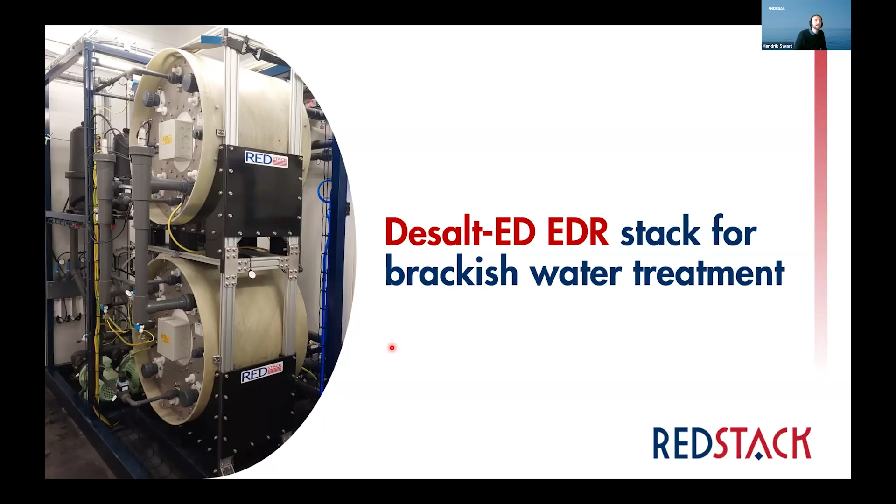So now I would like to give you some examples of how EDR can be implemented for desalination. First on brackish water treatment. And if I'm talking about brackish water, this is typically water that has a total dissolved solids content below 5,000 ppm. A very large application of EDR is then the tertiary treatment of treated effluent to create irrigation water. It is a lot used in the Canary Islands and also in Spain.

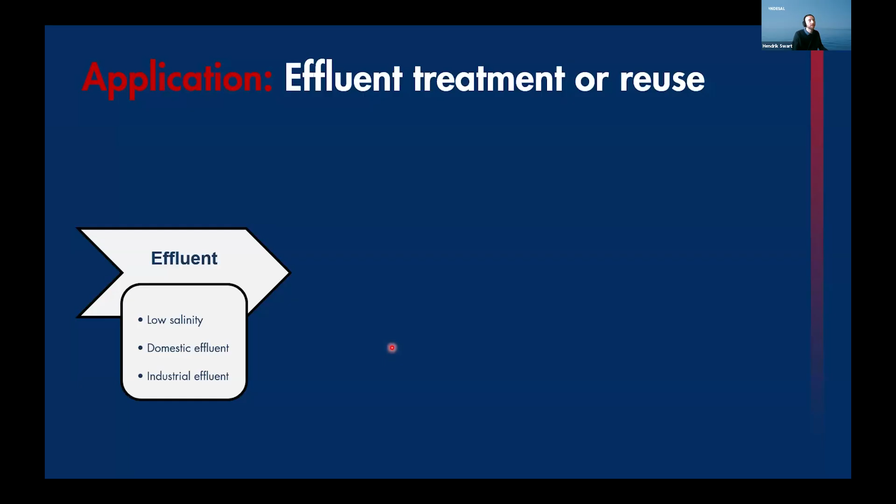So here we have the effluent from domestic sources. We're talking about producing irrigation water from it, but we can also treat industrial effluent. In most cases, there's some sort of pre-treatment required to remove the suspended solids and the organic materials that are still present to avoid fouling and clogging of the electromembrane stack. Then we have the real technology to remove the salt. With EDR, the advantage is that we can steer to the required product concentration or quality by putting in more or less energy, and then we create product water.

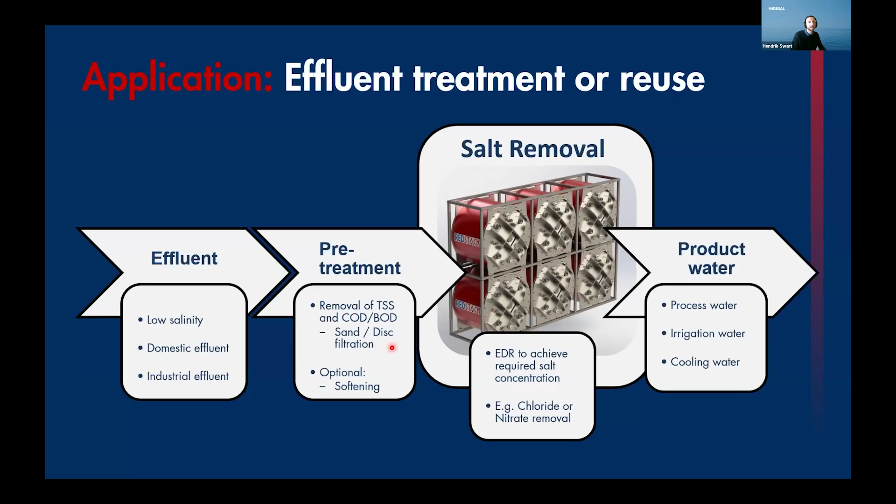In the case of treating domestic effluent, we can create irrigation water, but also within industrial applications, we can treat industrial effluent and then polish it to process water again. I have one case study I want to quickly go into detail. This was performed by us in the Netherlands at a horticultural wastewater treatment plant. A lot of greenhouses were discharging their water to this treatment plant where they removed the pesticides before they could discharge it, but they also had issues with chlorides and nitrates.

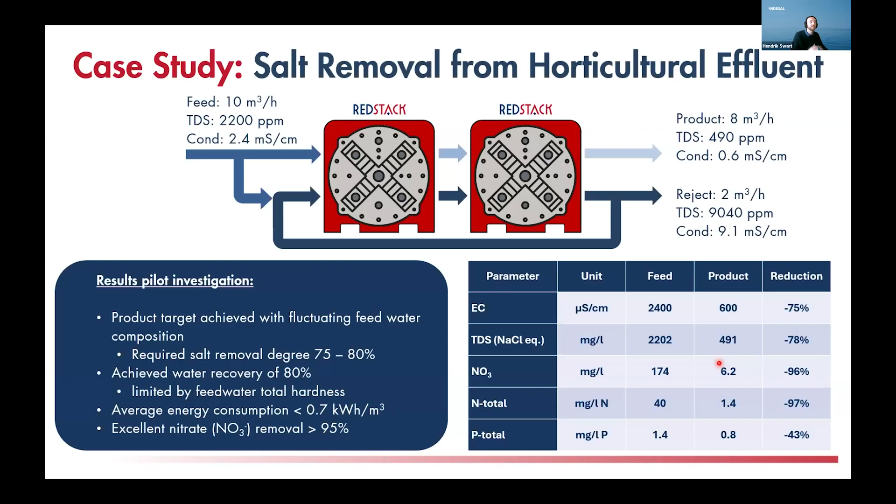That's where we came into the picture with our desalination technology. I want to mostly highlight that we have a two-stage system where in each stage we can remove up to 60% of the salt, ultimately achieving a maximum desalination of 84%. In this case, it was required to remove 75 up to 80% of the salinity. But the very nice results were that if you look at nitrate removal, there was a selective removal of nitrate over chloride. So with a removal of TDS of 80% or 75%, we could achieve a nitrate removal of over 95%.

The other application I want to touch upon is EDR for brine treatment. It's most commonly used to improve water recovery of other desalination processes that use RO, or to achieve zero liquid discharge. Here we have brine coming from desalination or another water treatment process. Mining or the textile industry also have highly concentrated brine streams.

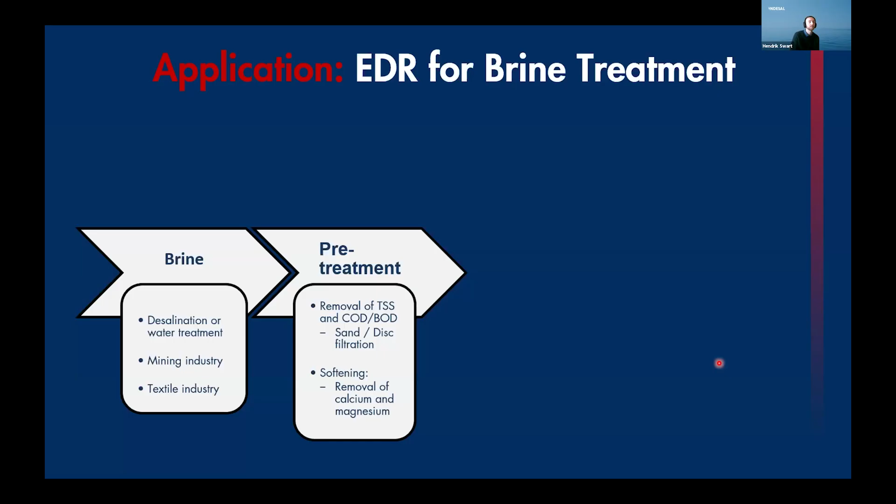We have pre-treatment to remove suspended solids and organic material, and optionally softening to remove calcium and magnesium, because if you want very high water recoveries, you get problems with scaling. So you remove the calcium and magnesium.

Then EDR is implemented mostly to further concentrate this brine stream, increasing its concentration and reducing the volume. The produced product stream could then be used again in the process or treated again. The concentrated brine stream then goes through a thermal treatment process, for example evaporation or crystallization, to achieve zero liquid discharge.

This is all I had to present for you. I hope you found it interesting, and thank you for your attention. Thank you so much, Hendrik.

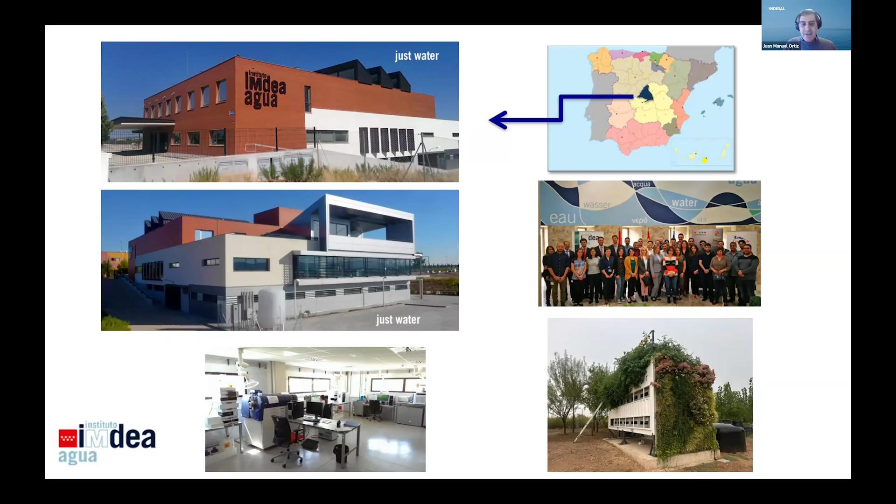I am a researcher there at IMDEA Water, working in the BIOE group. What we do there is environmental biotechnology, especially microbial electrochemistry, the study of interaction between microorganisms and electrodes. So as you can imagine, it's something in between microbiology and electrochemistry.

With this new field of research, we are also trying to develop microbial electrochemical technologies for wastewater treatment. Very simply, when you have anaerobic microorganisms in the natural environment, what they do is oxidize organic matter.

Through oxidation of organic matter, they extract electrons and use them for metabolism, for example production of energy, ATP. After this process they have a low energy electron, and they need to release it again. Some microorganisms are able to use a solid electron acceptor like iron 3 oxide as the final electron acceptor, resulting in reduction of iron 3 to iron 2.

With some imagination, you can put these microorganisms inside an electrochemical device, and what you get is a microbial fuel cell. The key is that you put these microorganisms in one compartment, and as long as you provide wastewater or organic substrate, they oxidize the organic matter and put the electrons into the electrode, a biocompatible electrode like graphite, for example. It's possible to produce some energy.

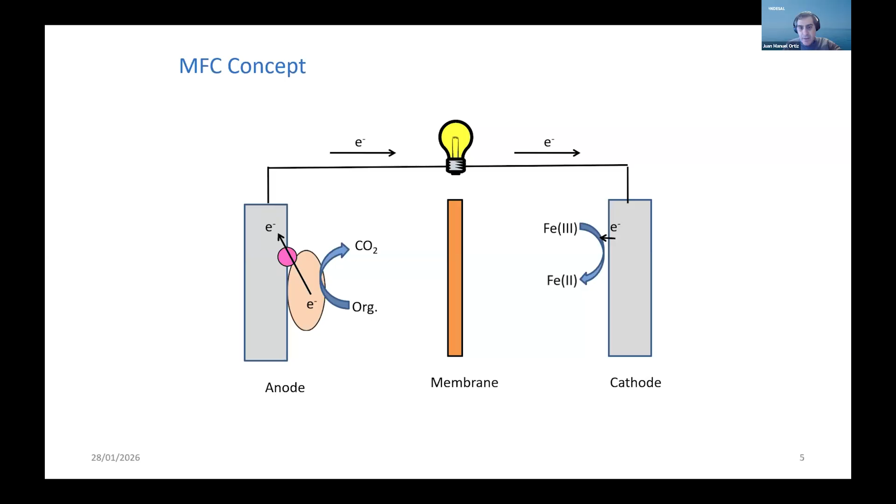The electron is combined in the catholyte, for example with a solution of iron 3. It's necessary to put a membrane in the middle, an ion exchange membrane, to separate the anodic and cathodic environments. This is the microbial fuel cell. It's quite good to be here, because I don't have to explain anything about ion exchange membranes, since you already know all about that.

Obviously, the current density of operation of this kind of system is not like the electrodialysis system mentioned before. Normally, an electrodialysis system works with a current density of 10 or 15 milliamps per square centimeter. What we have here is a system that provides current density around 1 milliamp per square centimeter.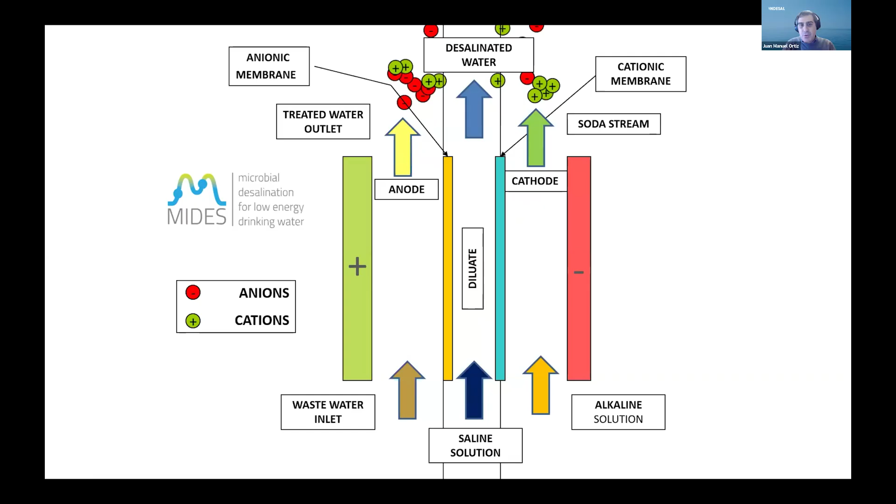The first definition of this concept was in 2009 by Cao at Penn State University. I have here a nice slide explaining what the electrodialysis system is. In this project, what we use is the electric field provided by the microorganisms.

using less energy. The objective of the MIDES project was to use this biotechnology, these microbial desalination systems, for decreasing the energy consumption in conventional pilot plants. The idea is to use microbial desalination to do the pre-desalination of seawater and produce brackish water from seawater.

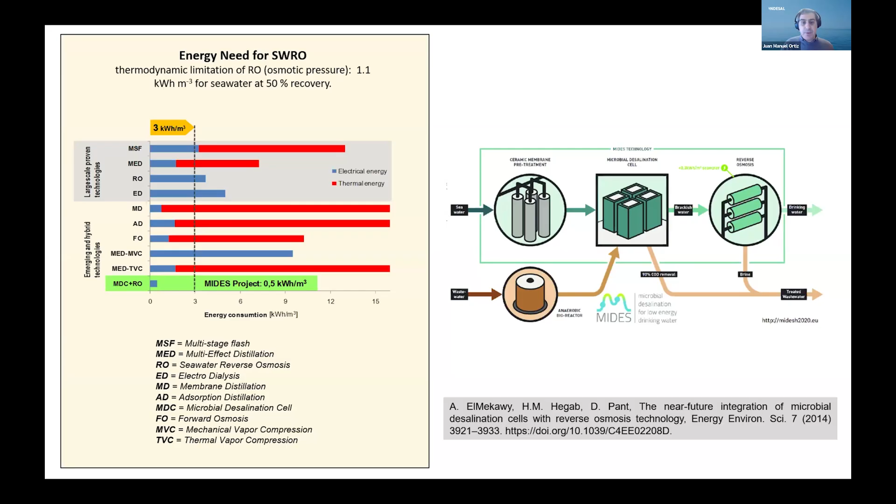Obviously, if you want to do this, you need an organic substrate source - for example, wastewater or wastewater from the food industry. This is the kind of system we are using for the study at lab scale.

It's a conventional filter press cell, in which you have membranes and electrodes. The electrodes are graphite, and the membranes could be conventional ion exchange membranes, homogeneous or heterogeneous.

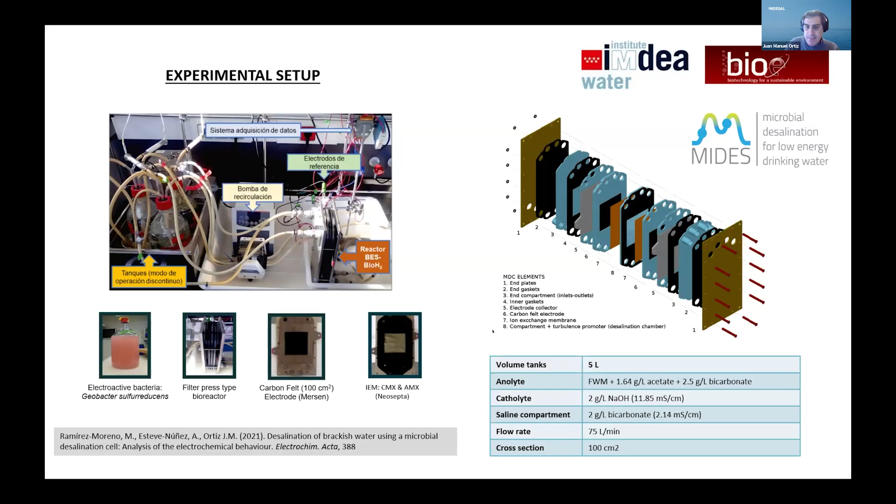The saline compartment is in the middle, and in the cathodic compartment we can use different electron acceptors, a redox mediator like ferro-ferricyanide, or maybe oxygen. So different electron acceptors in the cathode provide different performance of the system.

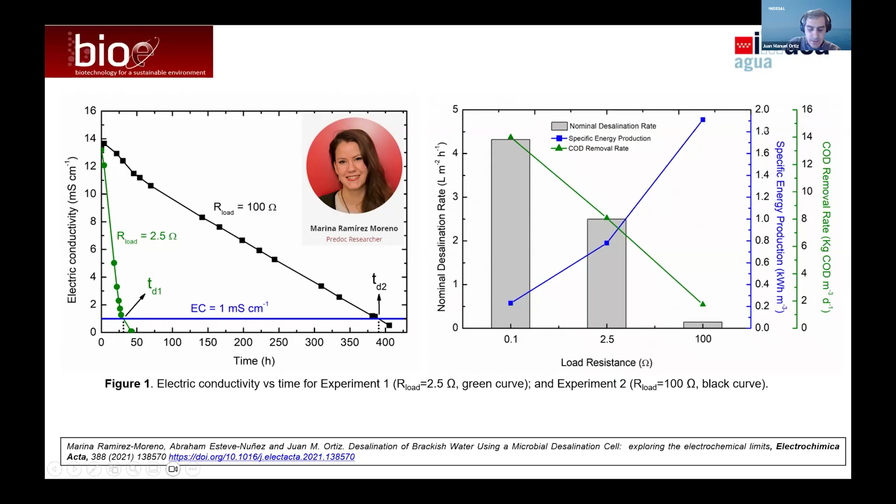One of the pilot plants is doing experiments in a desalination plant for brackish water in Denia, Alicante, Spain. The other one is in the Canary Islands, in Guia de Isora, trying to validate the technology for seawater desalination. If you're interested in the project, we have an open access book published by IWA, so you can check it out if you're interested in this kind of system.

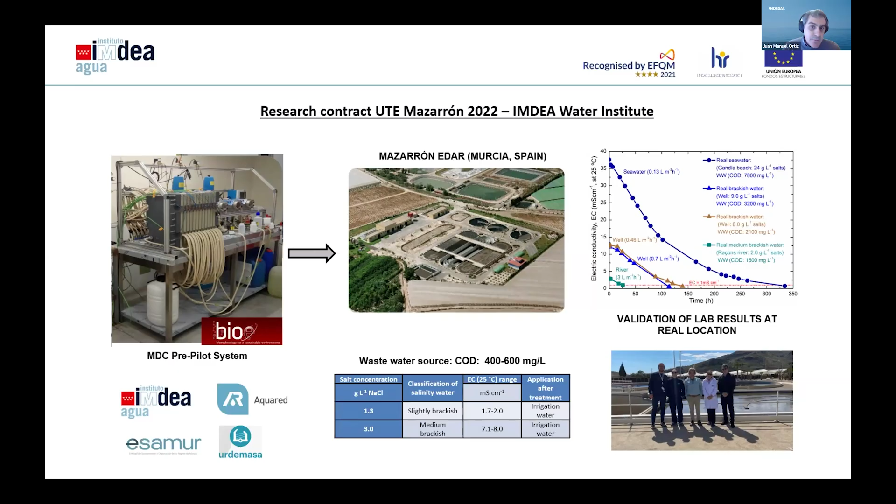Another thing I'd like to comment on, in my last slide, is that we are also testing this technology in a wastewater treatment plant for brackish water desalination at the end of the wastewater treatment process, in order to change the salinity for agricultural uses. We are developing this project in Murcia in order to reuse the water coming out from the wastewater treatment plant.

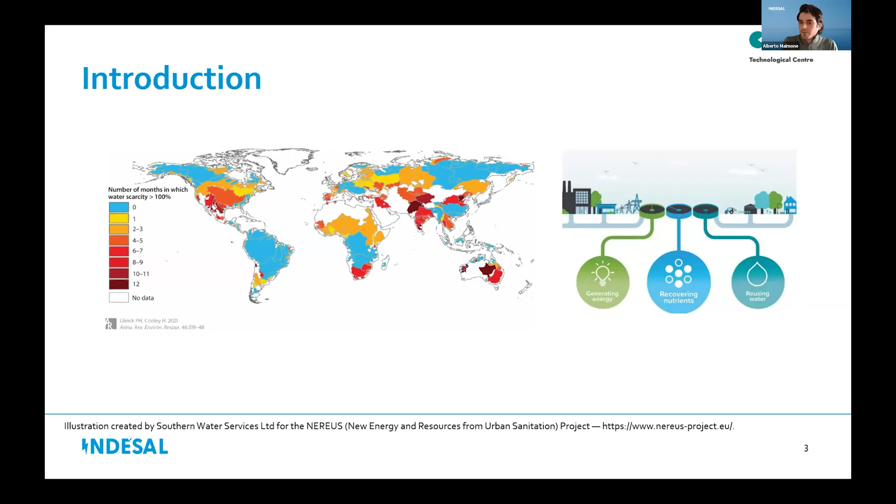In all capacitive systems, a voltage is applied between two electrodes, which can be immersed directly in the stream or can be separated from the stream by membranes.

Generally, the capacitive process has two stages, charging and discharging. First, during charging, the applied voltage creates an electric field that attracts anions and cations to the respective electrodes. Then, depending on the process, one or two options are possible.

Following, the desorption stage takes place once the solid electrodes become saturated, during which the applied voltage is reversed. During this stage, the ions can be released to the concentrate stream.

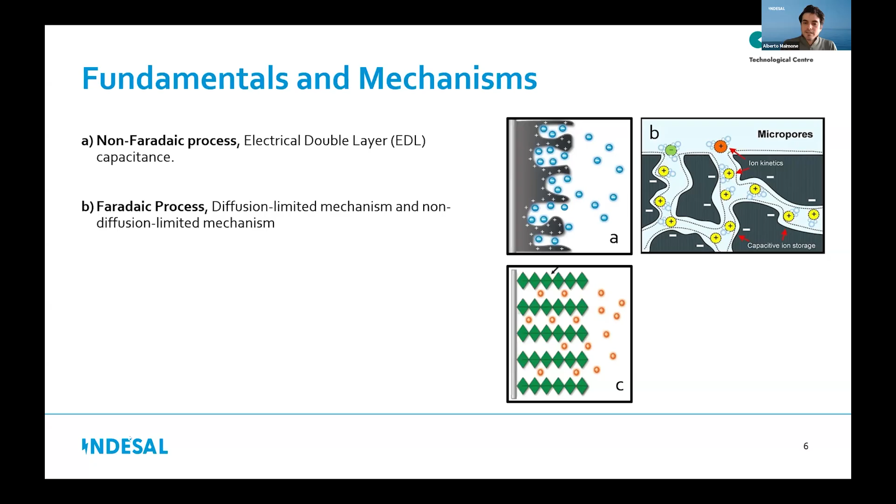It can either be diffusion limited, intercalation, or not diffusion limited, pseudo-capacitive. These aspects are very important and must be considered to improve the efficiency and selectivity of the capacitive process.

The effect of flow rate and current density on the charging and discharging stages was evaluated. It was found that while higher current density increases electrosorption of all ions, the selectivity decreased.

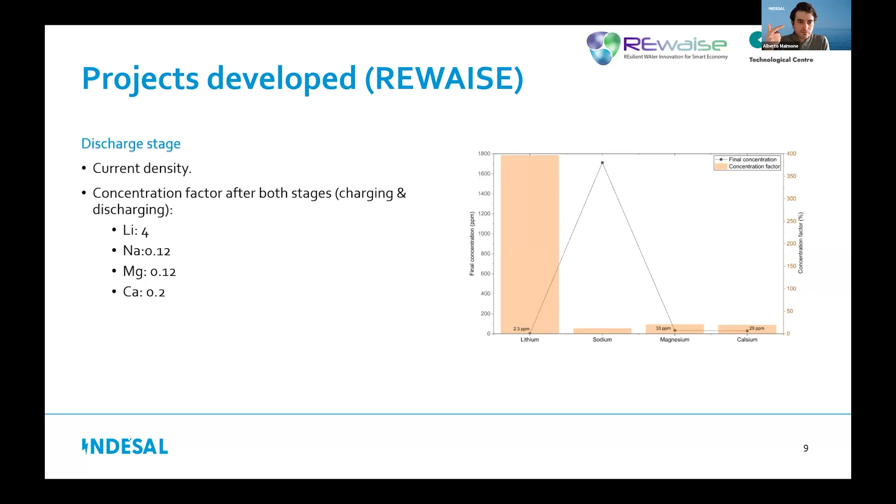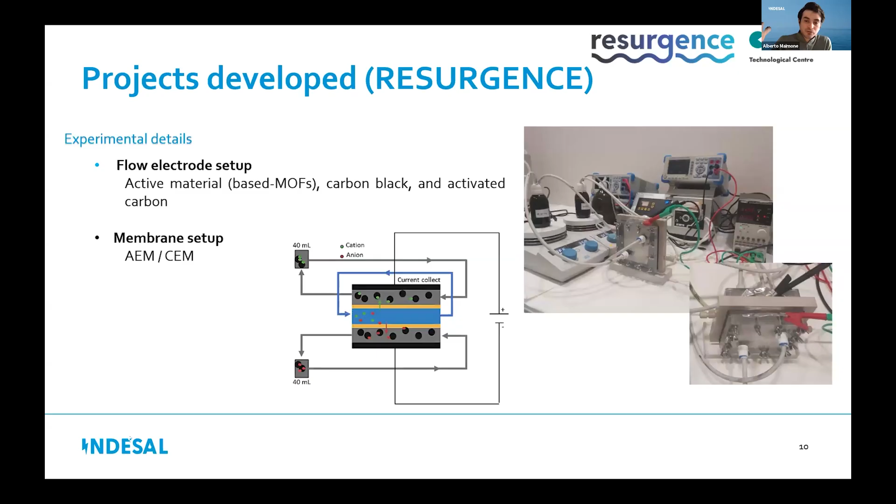In other projects like Resurgence, we have applied a different configuration setup. In this case, we use flow electrodes to treat an industrial stream using different metal organic frameworks as active materials, such as zeolitic imidazolate frameworks and copper hexacyanoferrate, Prussian blue, among others.

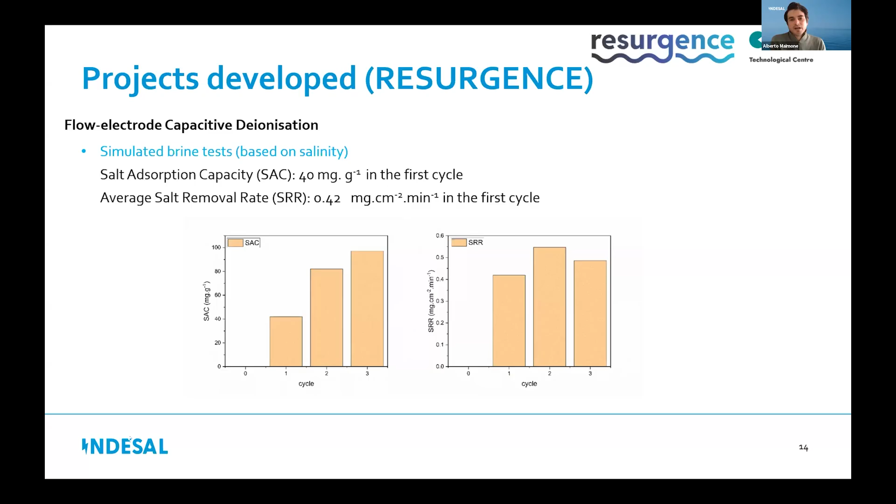We can achieve both relevant factors, salt adsorption capacity and average salt removal rate, from simulated industrial brine using ZIF-8 as the active material. This work on the Resurgence project is ongoing right now, and these values are not definitive.

Among the main challenges facing capacitive technologies is improving selectivity. To achieve this, it will be necessary to design materials with a specific pore structure and possibly make superficial modifications to improve chemical affinity with respect to the target ions.

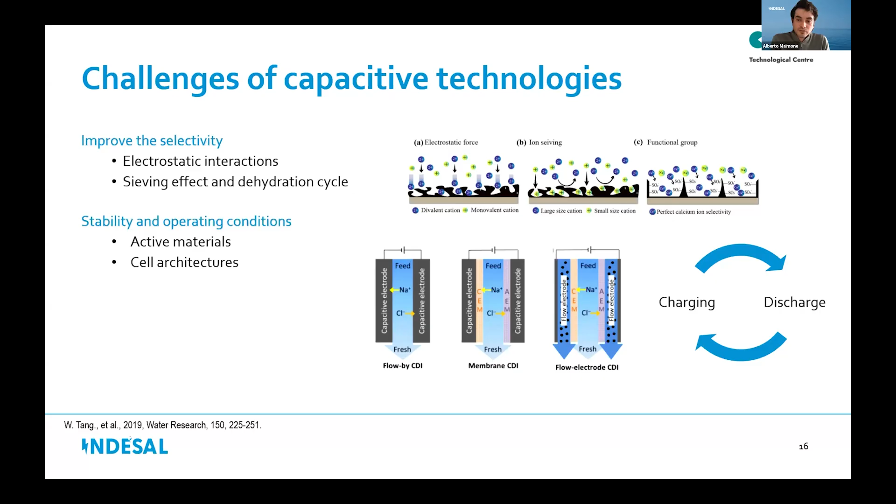It will also be necessary to improve the stability of the electrodes by using more stable active materials that interact reversibly with ions in the electrolyte. Finally, a solution like flow electrodes could improve operational conditions, resulting in lower cost and maintenance.